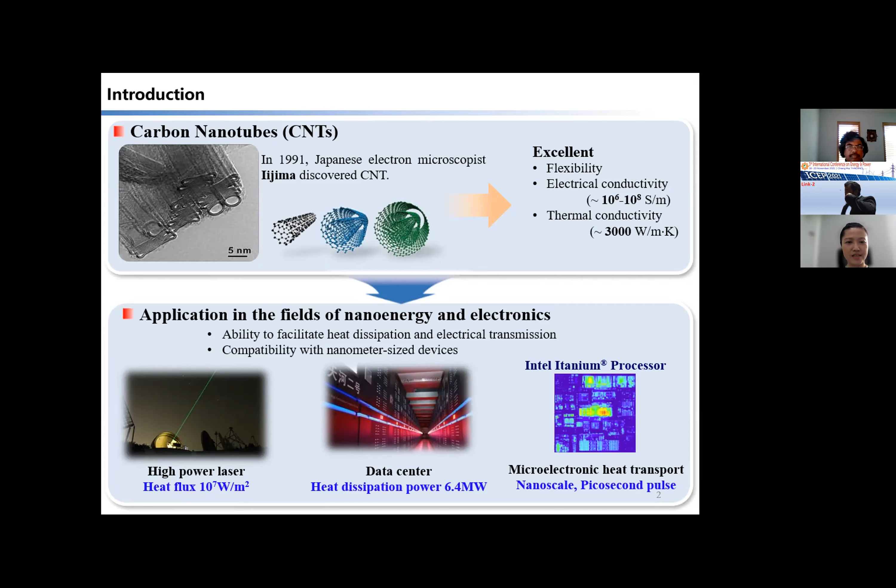Electron and phonon transport of carbon nanotubes has attracted much attention in the field of nano-energy and nanoelectronics due to its ability to facilitate heat dissipation, electrical transmission, and compatibility with various nanometer-size devices. However, once assembled, such as into bundles, fibers, and films for practical application, CNT tubes exhibit considerable performance deterioration due to phonon scattering, phonon mode quenching, electron hopping barriers, and numerous intertube interfacial structures acting as energy transport barriers. That is, the bulk electrical and thermal conductivities of CNT ensembles, a typical example being CNT fiber, show one order of magnitude reduction in both electrical and thermal conductivities. This clearly retards efficient application of the tubes. So developing new strategies to improve the interfacial thermal and electrical transport is critical for solving this drawback.

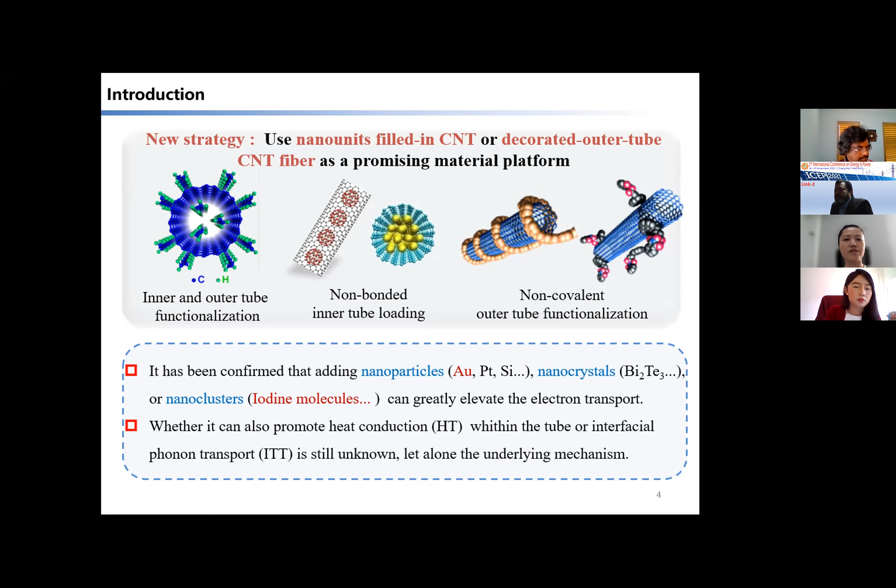We can use nano units filled inside the tube or decorated on the outer tube fiber as a promising material platform, such as inner and outer tube functionalization, non-bonded inner tube loading, non-covalent outer tube functionalization, and so on. It has been confirmed that adding nanoparticles such as gold nanoparticles, nanocrystals or nanoclusters, iodine molecules — the red color material is our focus — can greatly improve the electron transport. However, whether it can also promote heat conduction within the tube or interfacial transport, and the underlying mechanism, that's what I study.

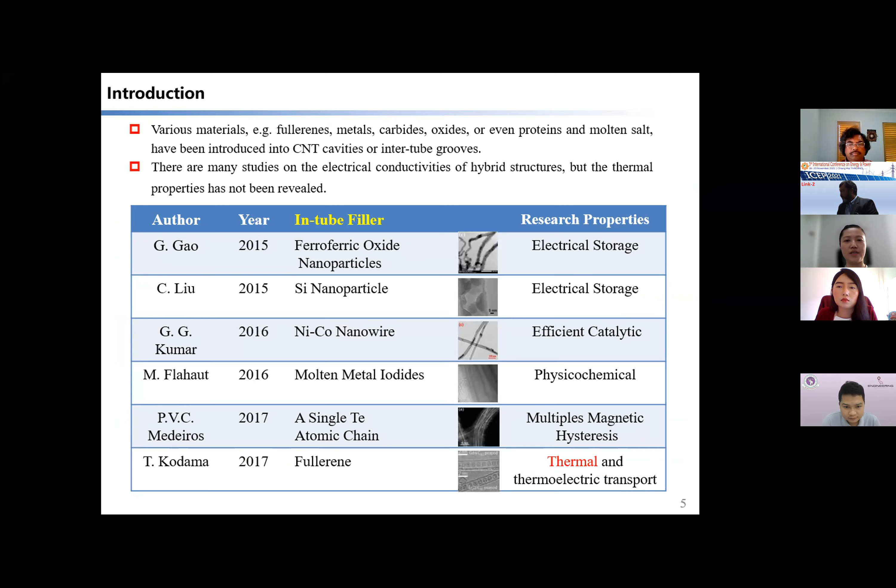In this talk, our material platform involves adding zero-dimensional spherical fullerene molecules and one-dimensional gold nanowires into the tube. On the other hand, we decorate gold metal nanoparticles and non-metallic iodine nanostrands onto the CNT fiber, outside the tube and inside the tube. That is, we have four kinds of assembled structures. The contribution of nano units to thermal, not electrical, transport is our main concern. The first two kinds of assembled structures are studied by molecular dynamics simulation due to difficulty, and the last two are studied experimentally and theoretically.

First, let's go to two interesting structures, that is heat conduction in filled carbon nanotubes. The first is a carbon nanopeapod — a carbon nanotube filled with spherical carbon-60 fullerene molecules. Carbon-60 represents the peas, and the tube represents the pod.

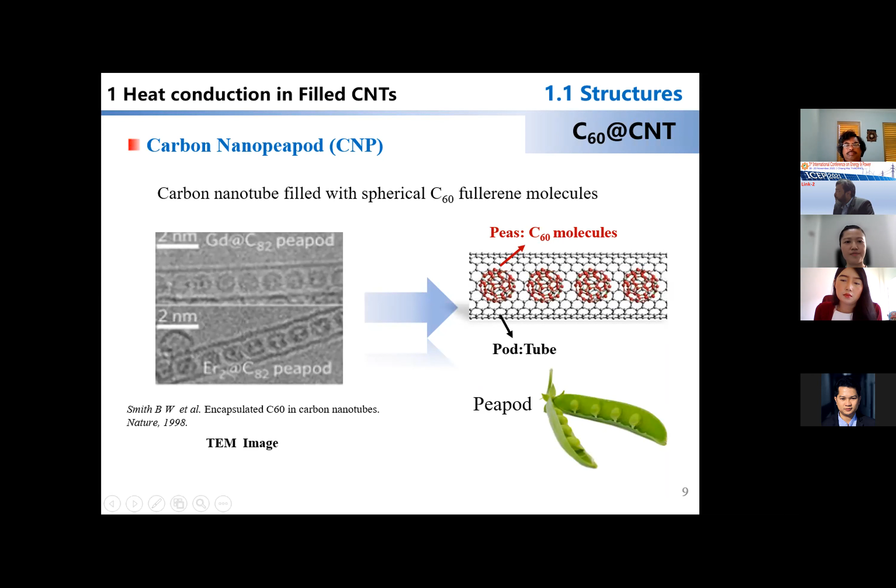Nanocables are composites of carbon nanotubes filled with nanowire. Here the filler is gold nanowire. The tube represents the insulating shell and the nanowire represents the conducting wire. The nanowire filled in the tube exhibits multi-shell packs consisting of coaxial cylindrical shells.

Based on carbon nanopeapod and nanocable models, we employed molecular dynamics to calculate thermal conductivity. The results show that filled carbon-60 can increase thermal conductivity up to 9.6 times, a huge enhancement.

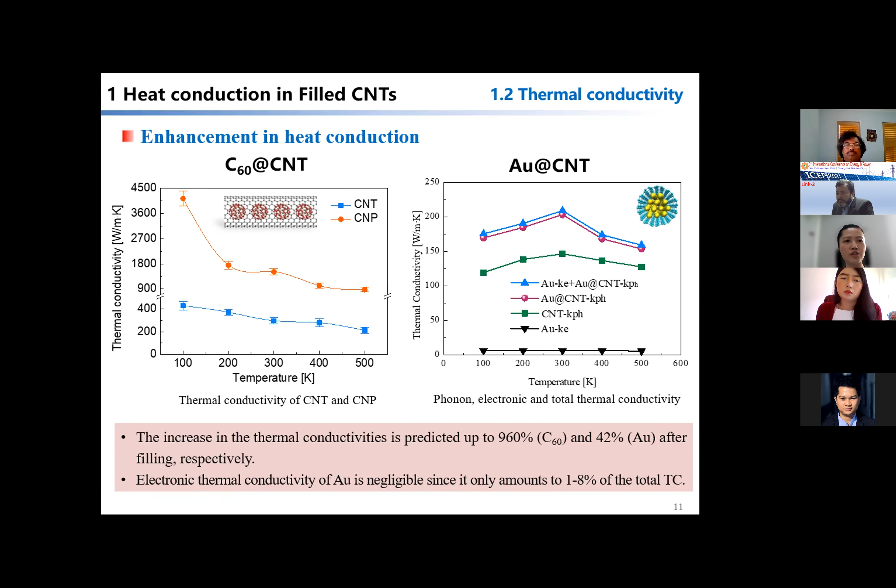Similarly, filled nanowire can also increase thermal conductivity, though not as much as carbon-60 filling, because gold and carbon are heterogeneous atoms. We further analyze this by local heat flux and the relative distribution of different phonon oscillation frequencies.

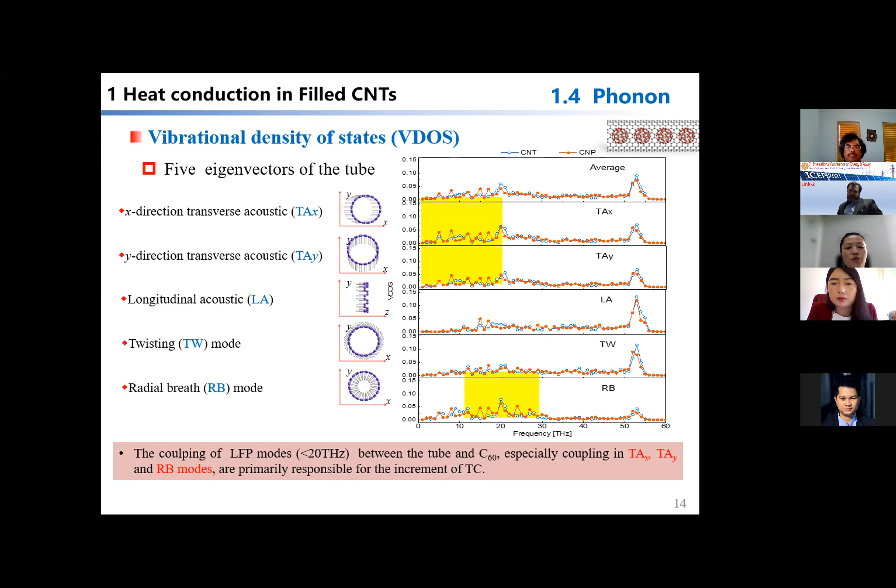We can see that the coupling of low frequency phonon modes, less than 20 THz, between the tube and filler especially coupling in XY direction transverse acoustic modes and radial breathing mode. We know that carbon tubes have a radial breathing mode, just like a breathing motion, which is primarily responsible for the increment of thermal conductivity.

However, when not fully filled, carbon-60 could have translational movement along the axis of the tube. As the filling ratio becomes larger than 50%, interestingly, the translational motion of carbon-60 molecules gets more and more restricted with increasing filling ratio.

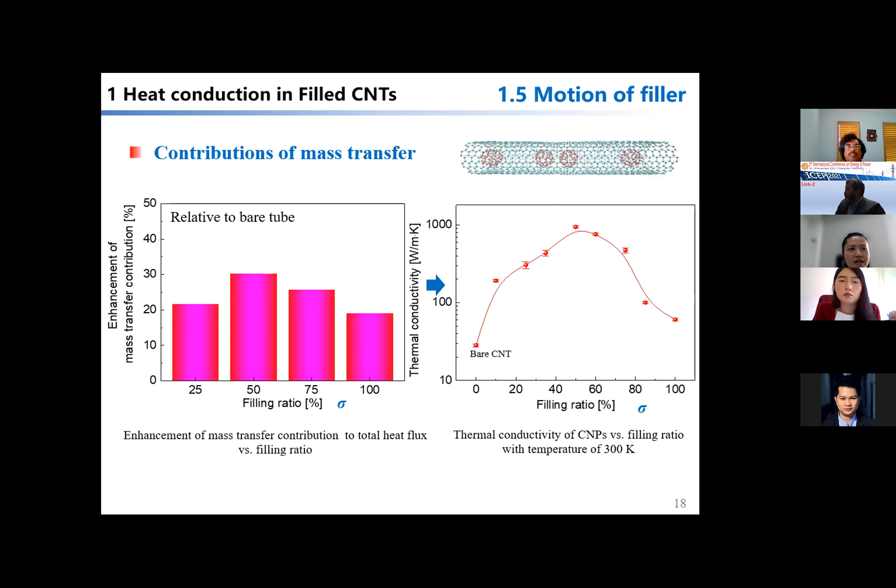This also explains why the thermal conductivity curve changes like this. That is, with boosted and then restricted motion of carbon-60, thermal conductivity first increases and then decreases with rising filling ratio.

So thermal conductivity could be precisely modulated by the filling-ratio-dependent movement of carbon-60.

That is, with increased filling ratio, the thermal conductivity increases first with boosted motion of carbon-60 and then decreases with restricted motion of carbon-60. It's a non-monotonic dependence on the filling ratio.

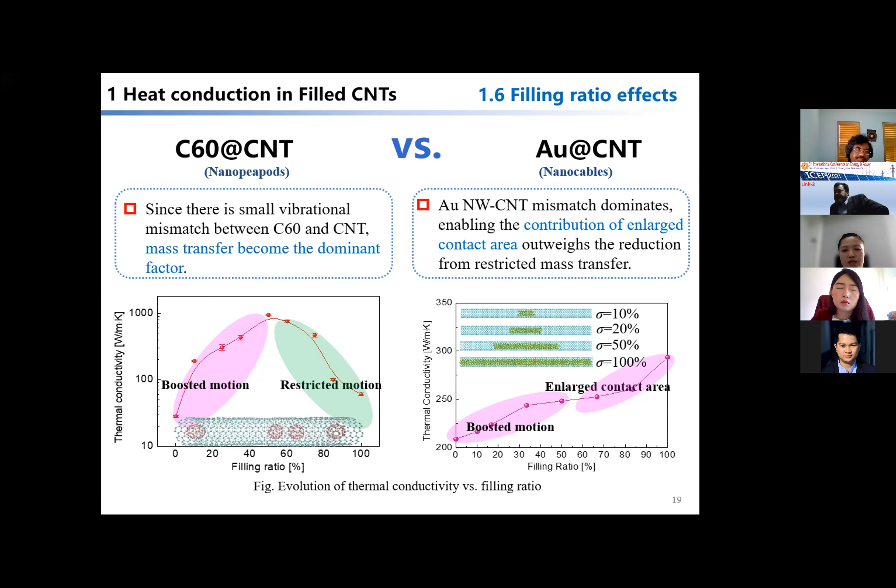Let's go to the second demonstration: intertube thermal transport of CNT fiber, intertube demonstration. Vertically aligned tube arrays were synthesized through chemical vapor deposition.

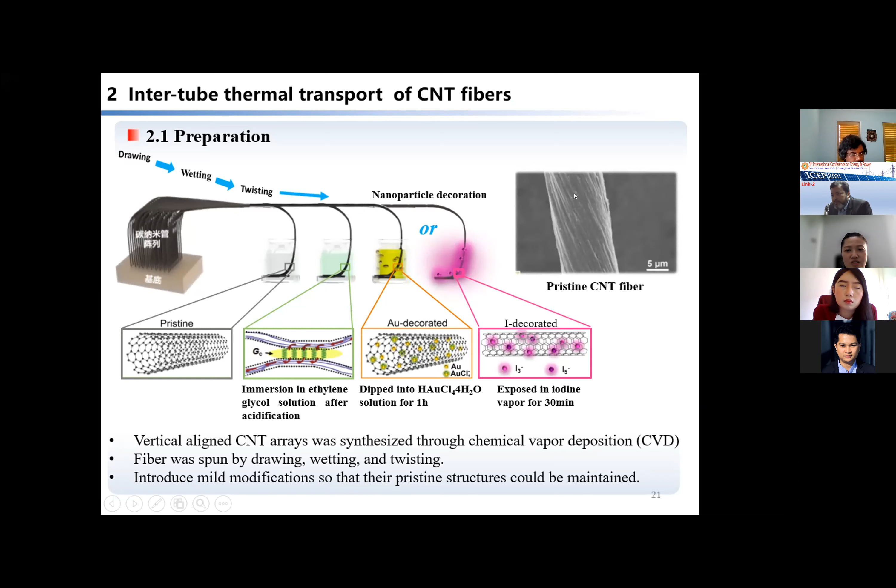Gold nanoparticle or iodine nanoparticle decoration: dip the fiber into the metallic salt solution or expose it to iodine vapor. We introduced mild modification so that the pristine structure could be maintained. This is pristine CNT fiber, which we compare with after decoration. After decoration, we tested the intrinsic thermal conductivity using our homemade 3-omega technique. The results show that after decoration, the intrinsic thermal conductivity for fibers less than 2 millimeters gets an improvement of about 70%. Both apparent and intrinsic thermal conductivity show quadratic length dependence owing to the radial heat loss through radiation.

Similarly, for iodine decorated fiber, this bar clearly shows that the intrinsic thermal conductivity of iodine decorated CNT fibers achieves a noticeable increase of up to 55%.

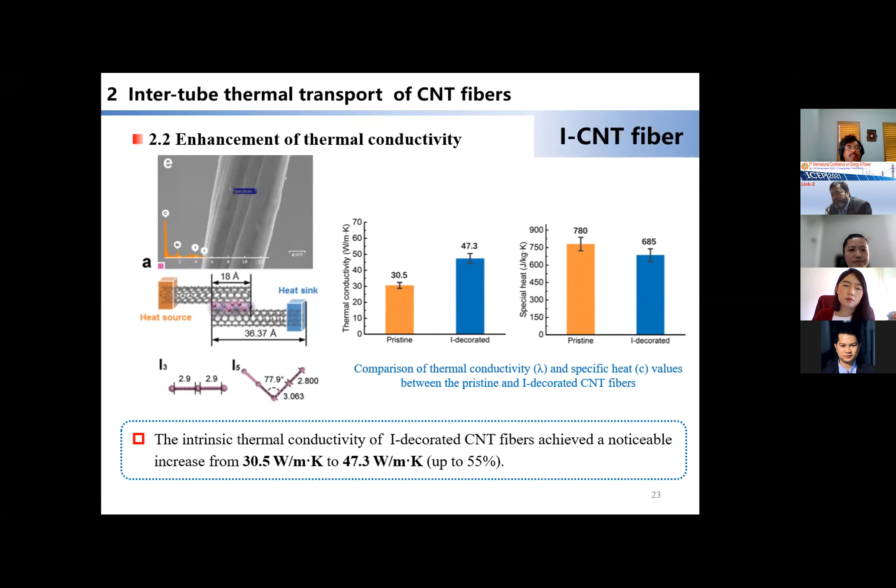The following is Raman spectra for different CNT fibers. We use Raman spectra to investigate the change of phonon vibrational modes of CNT fibers after decoration. Iodine molecules typically form charged I3, I5 chains, represented by two peaks in the Raman spectrum. The blue shift to the right in peak positions after decoration reflects a slight carbon-carbon bond shortening, which is a phonon-stiffening effect.

We can also see, after gold nanoparticle decoration, an obvious blue shift. Comparing these two pictures, the shift is equivalent, meaning an equivalent p-type doping effect - electrons were extracted from the tubes and used to reduce gold ions to gold atoms, that is, electron transfer. This results in weak bonding between gold and the tubes. Some sp2 graphitic plane-like carbon-carbon bonds transform into weak sp3 diamond-like bonds, without affecting the carbon nanotube structure. There is no real bond.

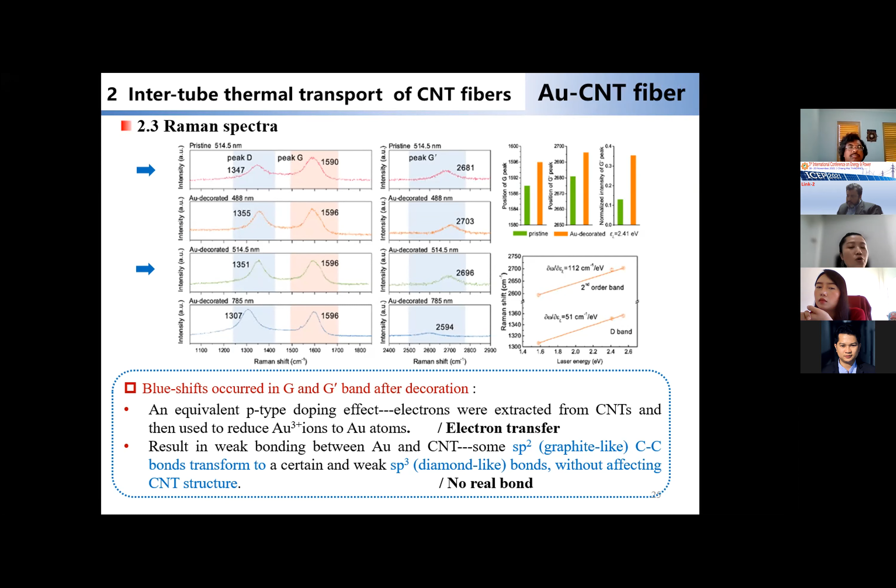Further examination of the frequency against laser excitation energy declares that gold decoration could retain a high phonon transport velocity, the same as the group velocity of a pure tube. This means slight decoration with gold nanoparticles will not deteriorate the phonon transport within the tubes.

Furthermore, let's look at the sharp increase of normalized intensity of the G′ peak. It reveals a stronger electron-phonon coupling, that is, electrons in gold and phonons in carbon atoms, enabling phonon mode interface coupling, possibly improving the interface transport.

This boosted phonon transport was further investigated using molecular dynamic simulations. Interestingly, with increased gold nanoparticle amount, the interface conductance first increases up to a plateau and then slightly reduces. We would deduce that excess addition of gold could possibly deteriorate the gold-carbon interfacial phonon transport and reduce the degree of boost.

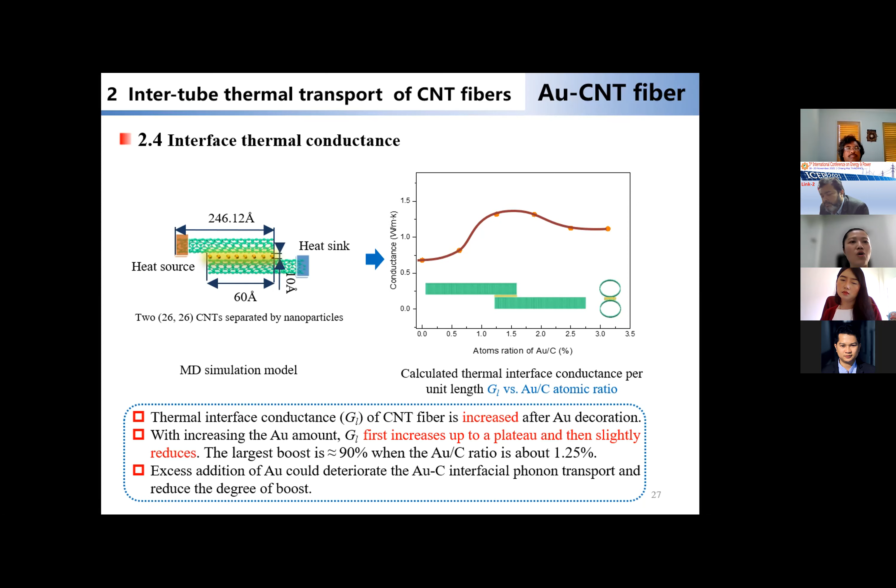I would like to give more details with VDOS analysis. We can see from the total VDOS that gold nanoparticles induce low frequency phonons, just like gold nanowires in a tube or carbon-60 in a tube, inducing low frequency phonon excitation in both the tube and the gold nanoparticle. With increased gold-to-carbon atomic ratio, we see an increase in low frequency phonons. Since low frequency phonons dominate the non-bonded thermal transport, the overall thermal conductivity gets boosted.

Let's look at the local VDOS of interfacial carbon atoms. On the heat source side first, it's similar to the pristine counterpart. On the heat sink side, there's a great enhancement of low frequency phonons in the frequency range of 2 to 3.5 THz, consistent with the gold nanoparticle vibrations, suggesting more low-frequency phonons are excited by gold nanoparticles in resonance with their vibration. I would like to emphasize that gold nanoparticles redistribute low frequency phonon modes into the interfacial carbon atoms and activate a resonance of low frequency phonons between the tube and gold nanoparticles.

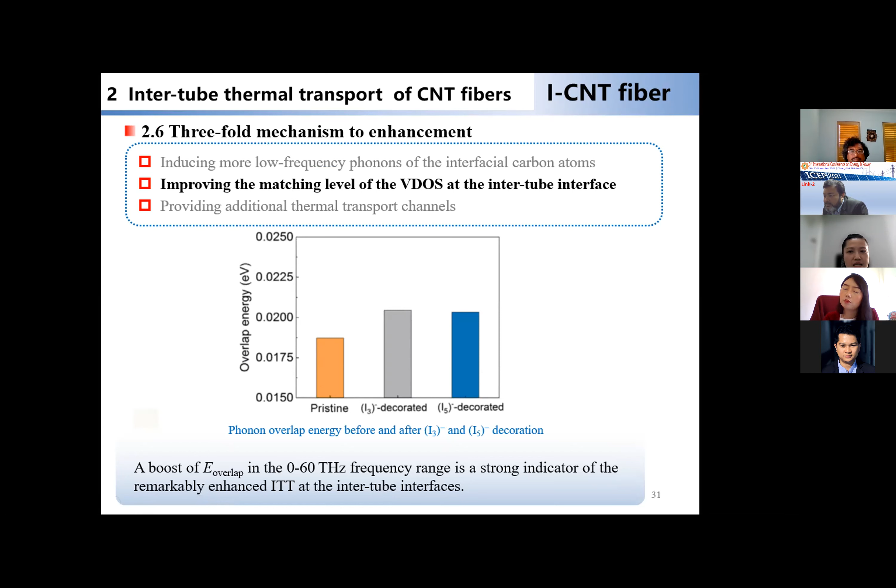The next mechanism is that iodine chains provide additional thermal transport channels. We further calculate the interfacial heat flux originating from tube 1 and tube 2, and tube 1 to iodine filler interactions, and their sum. This suggests that the CNT tube and iodine interactions indeed facilitate interface transport, which also confirms that iodine chains provide thermal transport channels between tubes.

Okay, finally, I would like to give a conclusion.

For enhancement of heat conduction in carbon nanotube assembled structures, we get it by adding carbon-60 or gold nanowire into the hollow tube of tubes, or using fiber decorated with gold nano units lying in or out the tube. They introduce more low frequency phonon (LFP) vibration density of states, since LFP dominates non-bonded thermal transport. So the overall thermal conductivity in composite nanostructures would get boosted. Of course, other discussed factors, such as high level matching of VDOS, movement of filler, enlarged contact area, slight decoration, and additional thermal transport channels are also beneficial to the enhancement of heat conduction.

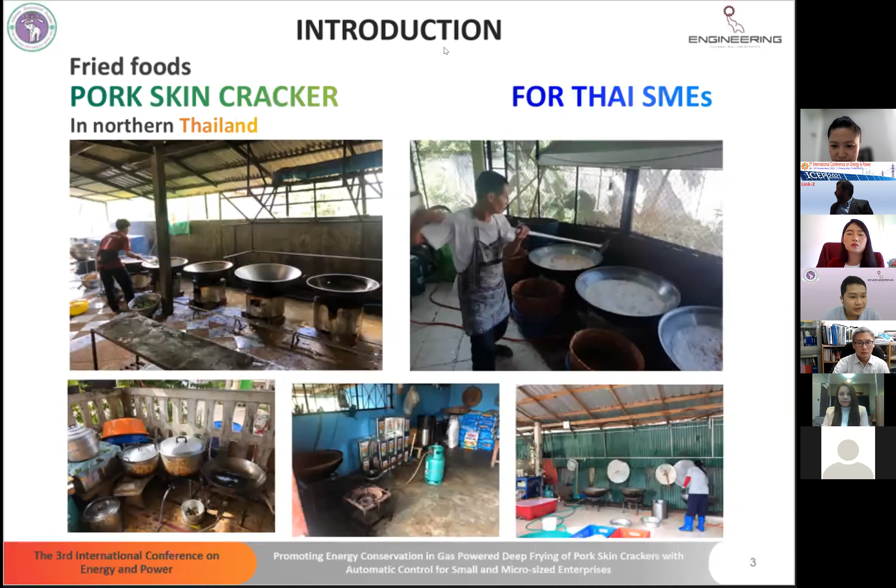In pork skin cracker production, these are the main things: the first one is a pan used to fry the raw pork skin, and the second one is a heat source, usually from LPG combustion. The operator controls the heat by this valve.

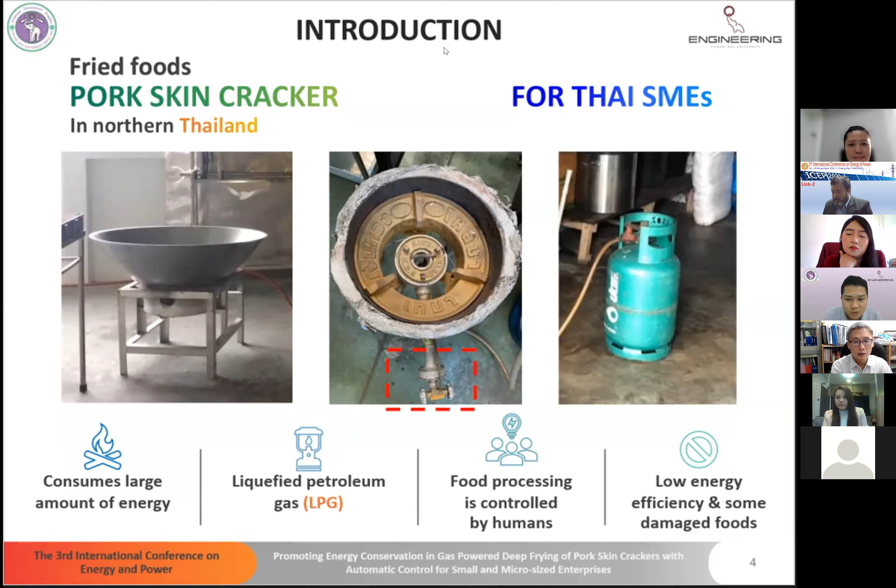This is less accurate control, so the process consumes a lot of energy and has very low energy efficiency, so some products are damaged.

So the objectives of this work were to develop a cost-effective and energy efficient fryer for processing pork skin crackers, and to demonstrate this proposed fryer to Thai pork skin cracker SMEs.

A moment, I cannot click. Okay.

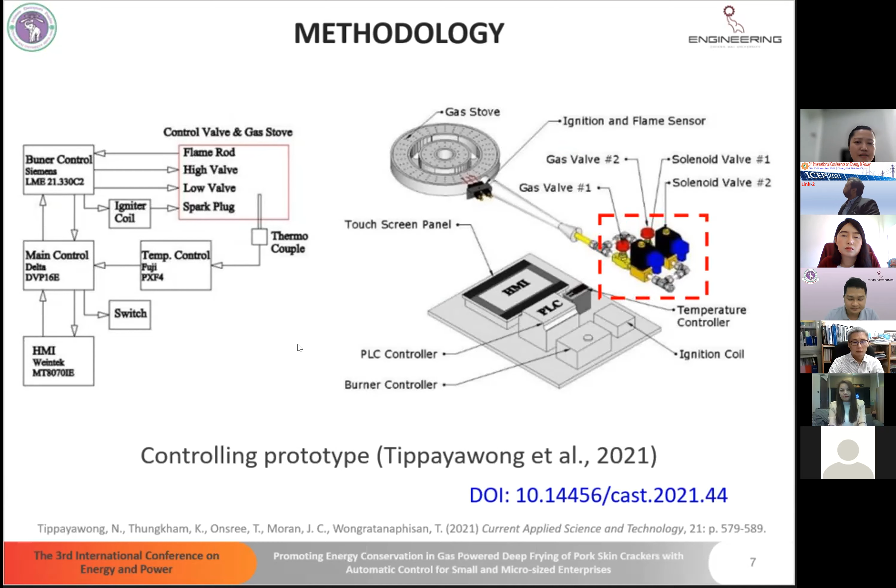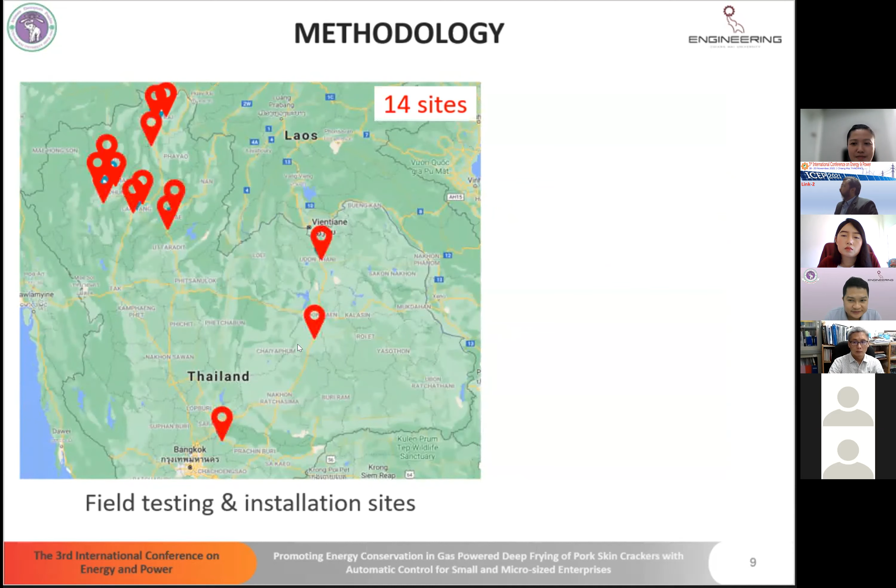The developed fryer was sent to 14 sites in Thailand, and we trained them on how to use our fryer, and they recorded the data of LPG use for us.

This is all the 14 sites that we visited. After using the fryer for almost 2 months, they said that they were satisfied with the operation and the quality of the product.

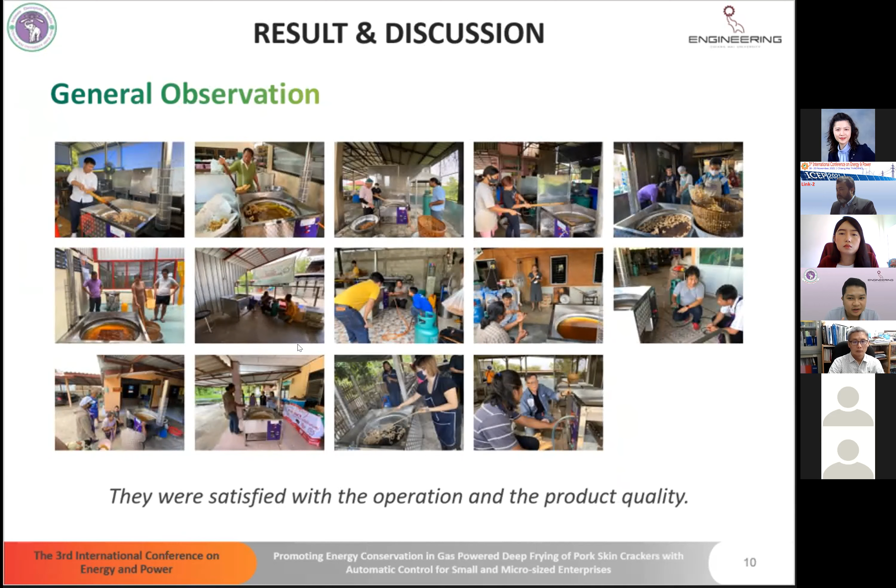Academically, by comparing the traditional one and what we developed: by the traditional fryer, or without the controller, the pork skin crackers normally take about 20 to 60 seconds to get done, and the frying oil temperature tends to drop when the raw pork skin is put into the pan.

So the operator would turn the LPG up to increase the heat input. By our developed fryer, the frying oil temperature was better stabilized at the desired value, so the operator just focused on the snack, letting the adjustment of the oil temperature be done automatically.

This is to show the difference between the traditional and what we developed fryers - a comparison of frying oil temperature between no control and having the control.

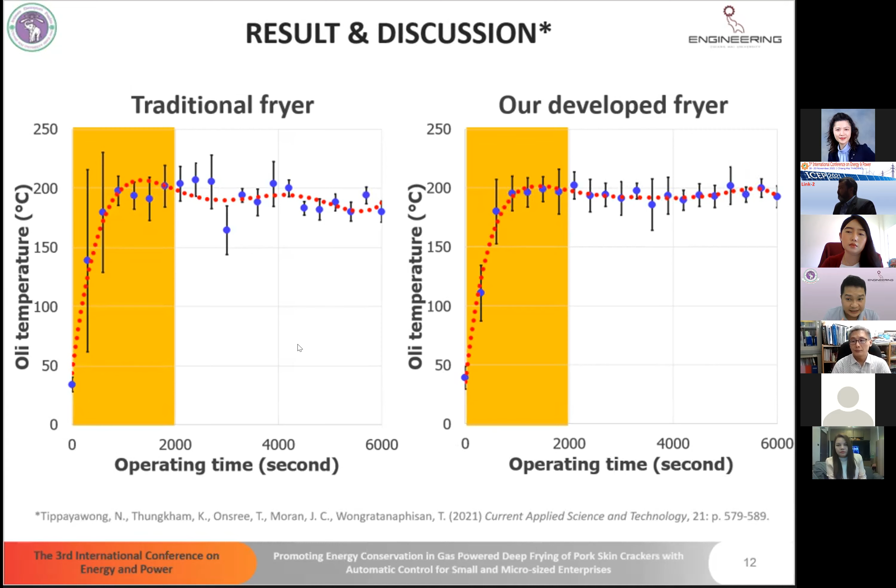And for our survey, for the 14 SMEs, generally they use about 60 to 800 kilogram of raw pork skin a day, and they use 3 or 4 hours a day to prepare the raw pork skin, and 2 or 3 hours a day to fry the product. And they work 5 or 6 days a week.

This is the data of LPG use of each SME we visited.

We compared the LPG use of them. We found that about 21% of LPG can be saved if they use our developed fryer.

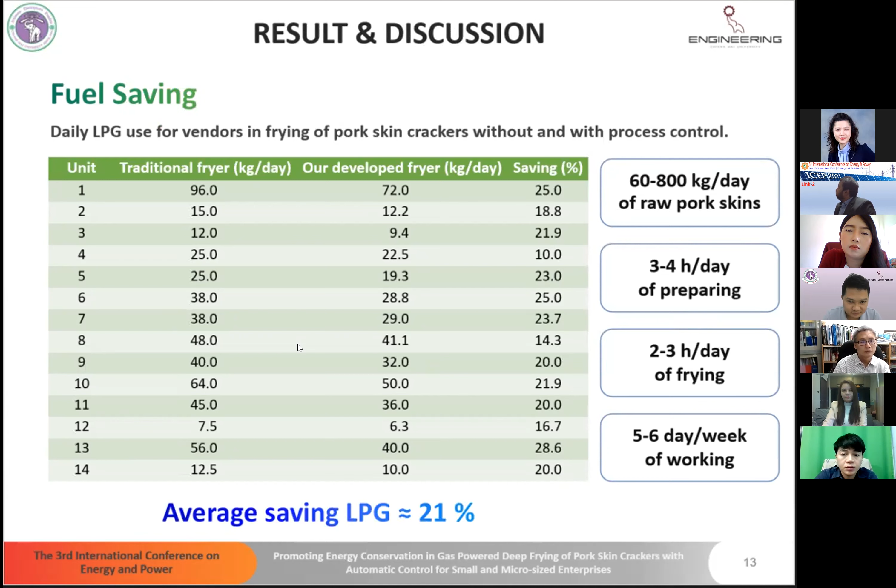With this number of savings, in a general case, a pork skin producer, let's say they have 100 kilogram a day of raw pork skin, and they can buy LPG at about 0.8 US dollar per kilogram.

By this number, they will save money for about 450 US dollars in 1 year. So if we sell the fryer at 2,700 US dollars, the owner who buys our fryer will have a 6 year payback.

Even though this number is quite big, for large production or with subsidy, it can be much smaller.

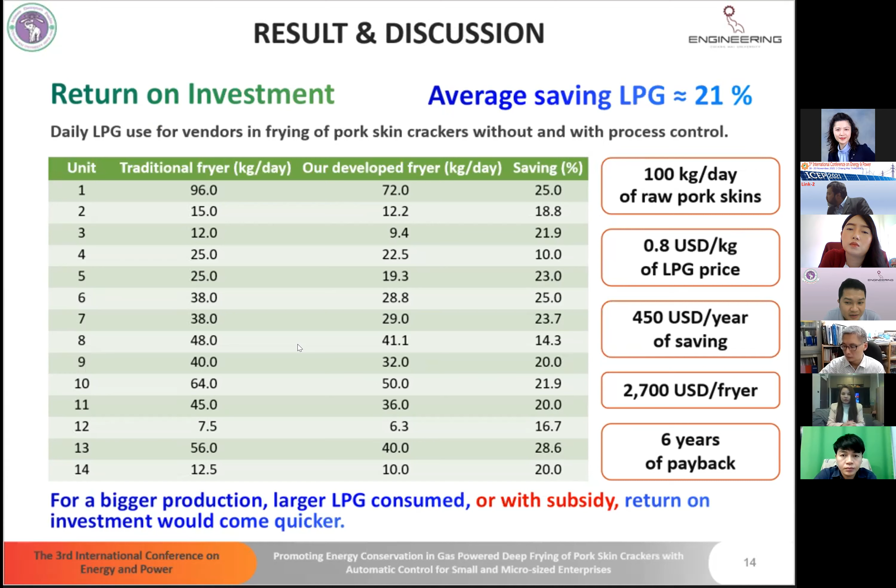So by now, I can conclude that our developed fryer appears to work very well - acceptable operation and saving in LPG consumption.

Academically, the employment of the LPG burner controller offers more precise process control, improved fuel economy, and energy efficiency for small and micro-size food processing enterprises.

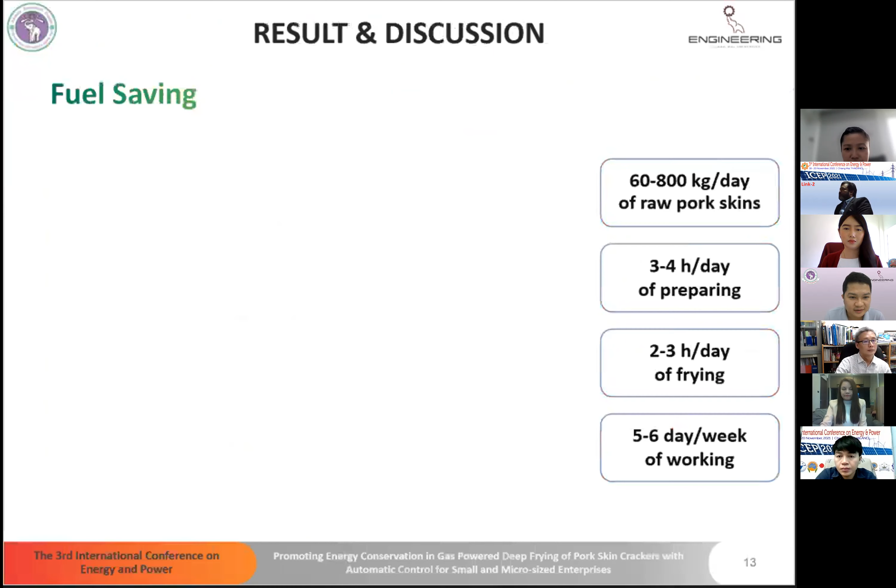Any question? Your presentation makes me hungry, a little hungry. Okay, of course, we just had our lunch. Any question?

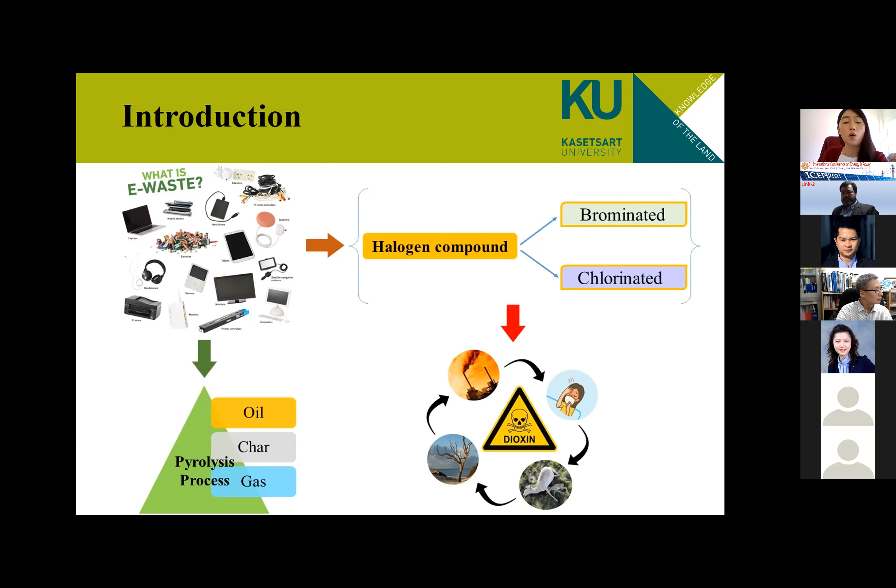The pyrolysis process is an interesting alternative technology because it can transform e-waste into many products, including oil, char, and gas.

Raw material: the raw material sample was cable.

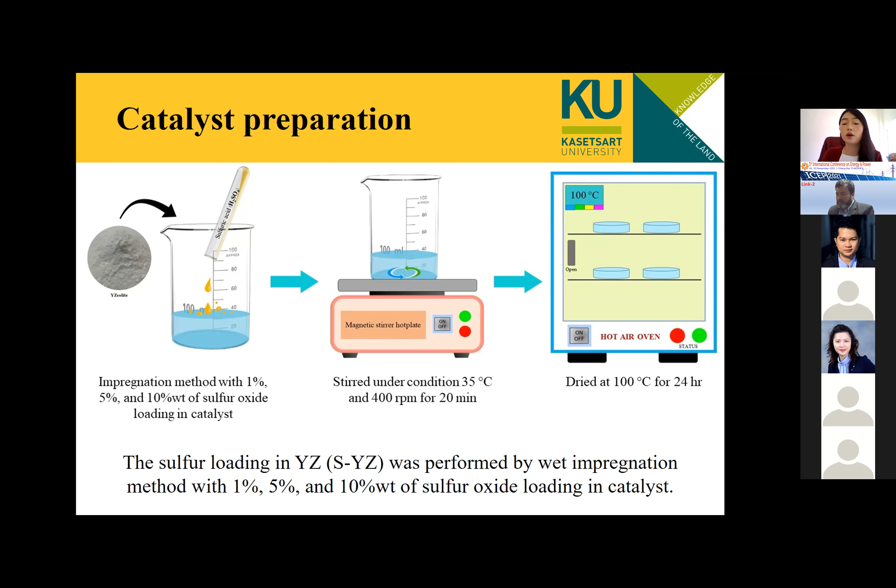Catalyst preparation. The conventional catalyst was Y zeolite. Sulfur loading in Y zeolite was performed by wet impregnation method with 1, 5, and 10% by weight sulfur loading in the catalyst. Firstly, 10 grams of Y zeolite and sulfuric acid was mixed in deionized water. Then the mixed catalyst was stirred under conditions of 35 Celsius and 400 revolutions per minute for 20 minutes.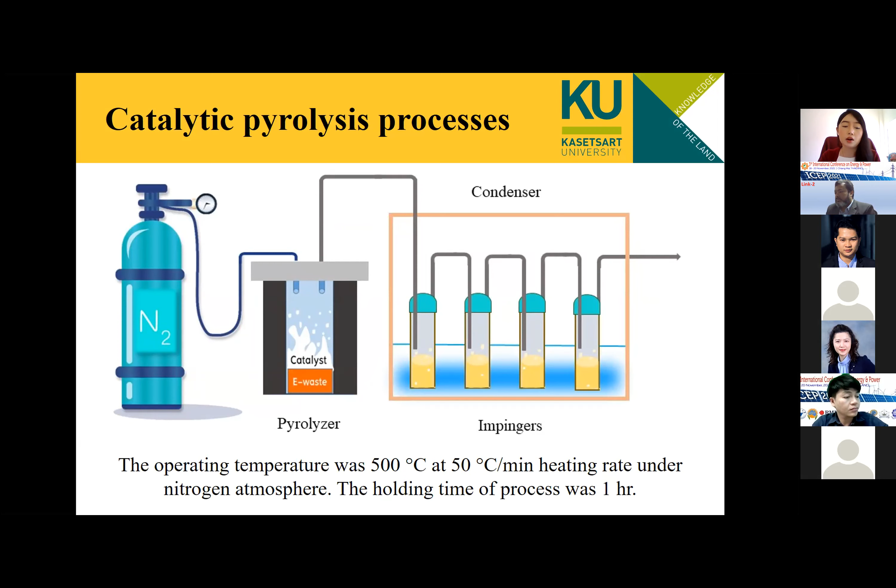Catalytic pyrolysis process. Input of these experiments consists of 50 grams of raw material and 10 grams of catalyst. The operating temperature was 500 Celsius at 50 Celsius per minute heating rate under nitrogen atmosphere. The holding time of the process was 1 hour.

The analysis methods used were proximate analysis, ultimate analysis, BET, XRF, XRD, SEM, EDS, and the last one is ion chromatography or IC.

Result and discussion. Catalyst characterization.

Looking at table 2, you can see the catalyst characterization. Sulfur generally can be absorbed in the Y zeolite catalyst. The BET surface area and porosity of the catalyst were negligibly different with 1% sulfur additive. However, the additive of 5 and 10% sulfur in white silicide catalyst gave impact on BET surface area, pore volume and average pore size. The BET surface area and pore volume of 10% sulfur Y zeolite were significantly reduced due to the excess sulfur in the white silicide catalyst.

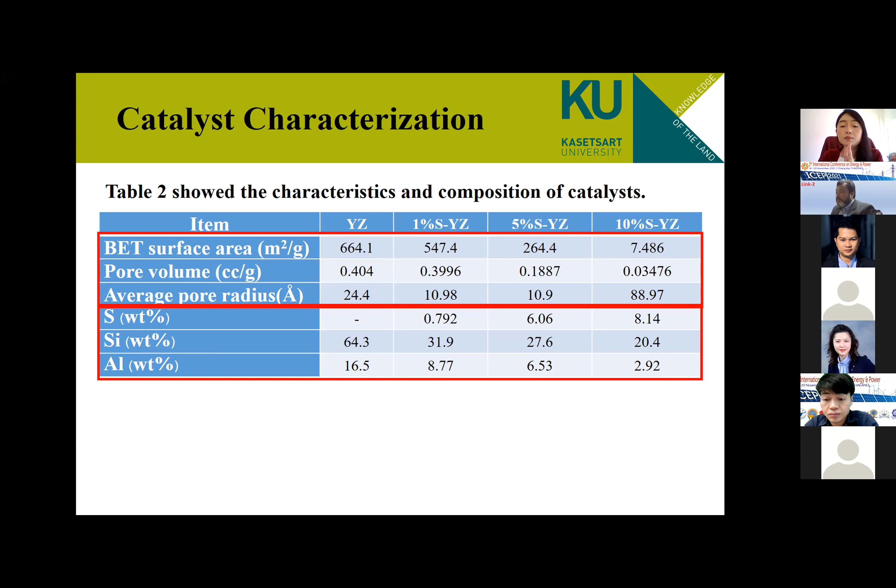The major chemical composition of sulfur white silicide was sulfur, silica, and alumina, as measured by XRF. The silica and alumina were the majority of the original white silicide composition.

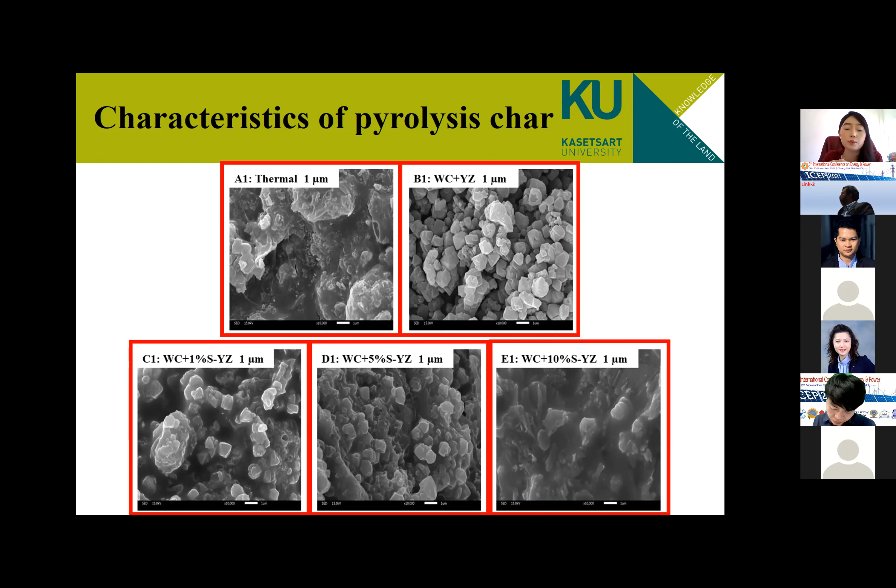Mechanism of the dechlorination process. For the white silicide catalyst, the chlorine yield in pyrolysis char was increased compared to thermal pyrolysis, because the white silicide had high porosity and strong acidity. These characteristics of white silicide enhanced chloride ion capture and the cracking of organochlorinated compounds in pyrolysis oil.

In case of loading sulfur white solid catalyst, the chloride ion capture of sulfur white solid catalyst was higher than that of white solid, because hydrochloride in the volatile matter was captured by sulfur trioxide in the catalyst and reacted to form chlorosulfuric acid.

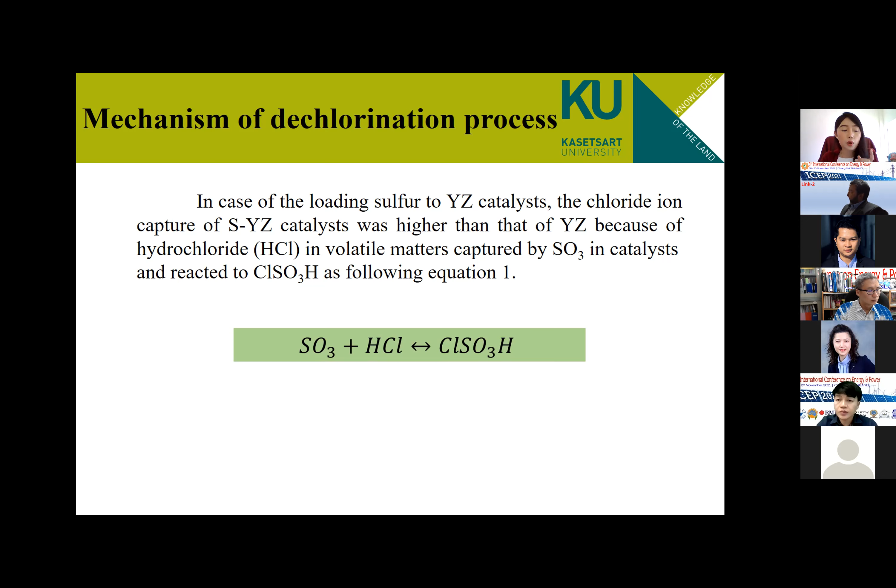As following equation 1: the mechanism of white solid in 10% sulfur white solid was chloride ion cracking and capturing constantly. In this case, the cracking rate of 10% sulfur Y zeolite catalyst was greatly higher than the capture rate of the sulfur trioxide. In addition, the 10% sulfur rate had lower porosity and BET surface area.

Therefore, 10% sulfur rate could not absorb all chloride content in the volatile matter. This result shows that the amount of pyrolysis oil is low while the amount of pyrolysis char is high by waste cable pyrolysis. The pyrolysis char component was carbon, silica, calcium, titanium, and aluminum ion.

The yield of chloride in pyrolysis oil was 2.98 to 11.47% by weight of total chloride content.

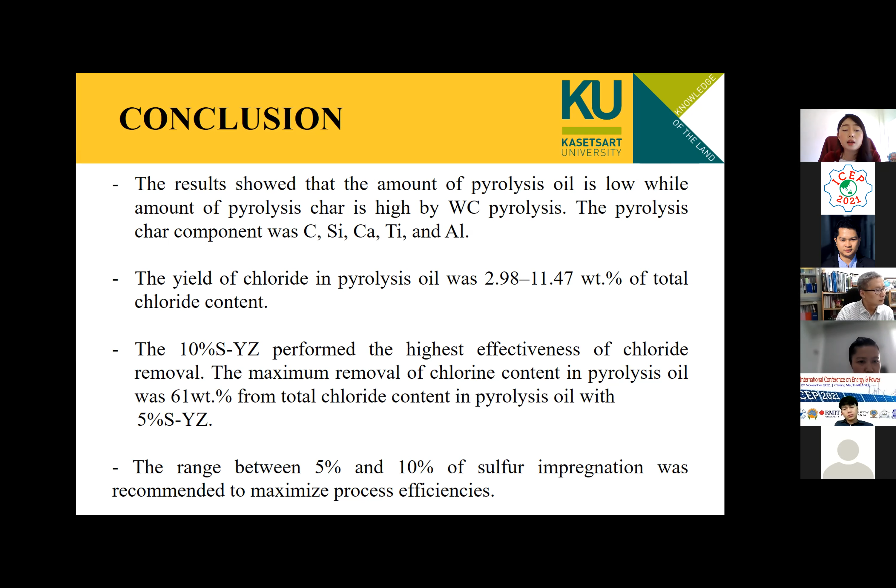The 10% sulfur Y zeolite performed the highest effectiveness of chloride removal; the maximum removal of chloride content in pyrolysis oil was 61% by weight from total chloride content in the pyrolysis oil with 5% sulfur Y zeolite. A sulfur impregnation rate between 5 and 10 was recommended for maximum process efficiency.

Thank you for attention. Do you have any question?

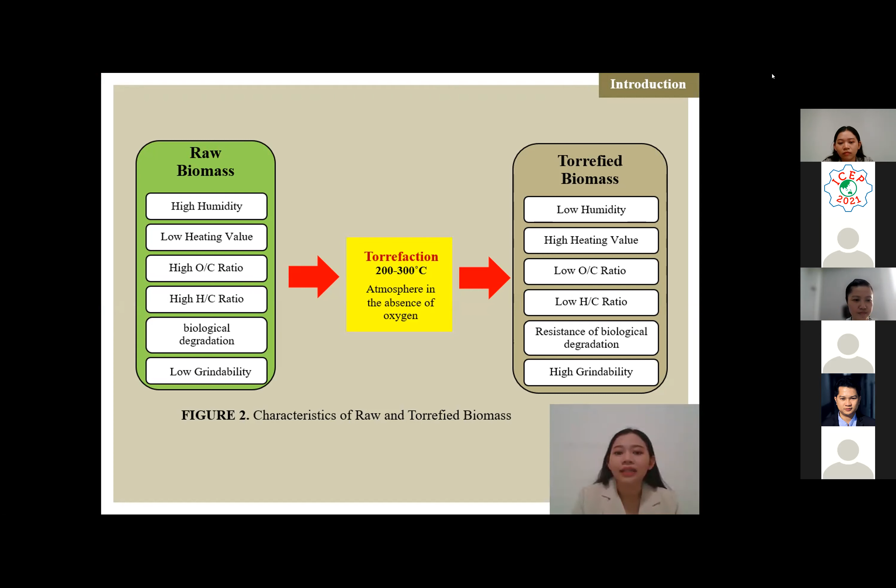The instrument used in the experiment is a fixed bed reactor. It is made of stainless steel, having 50 mm outside diameter and 1000 mm length. The temperature was measured and controlled by a K-type thermocouple and a proportional integral derivative temperature controller.

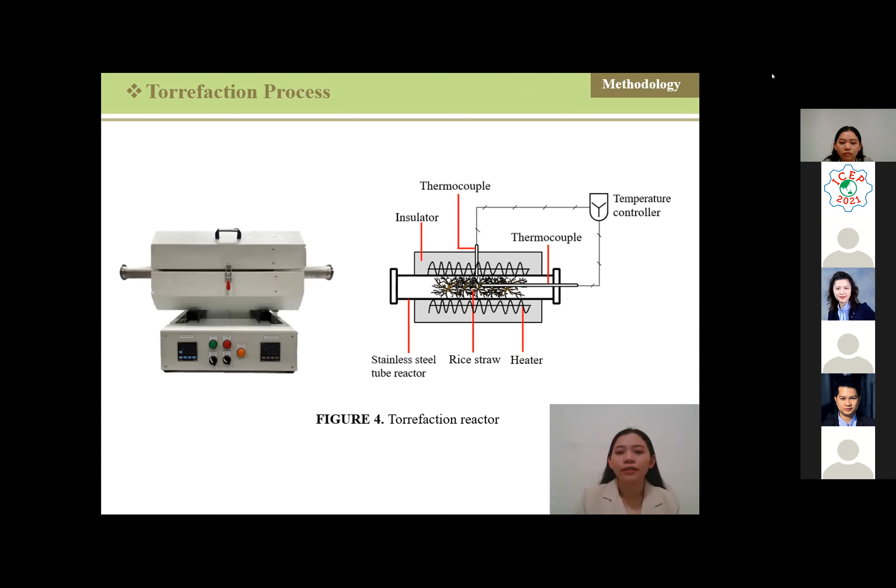The experiments were planned by central composite design between 200 to 300 degrees Celsius, reaction time 25.7 to 54.3 minutes. The heating rate was set at 5 degrees Celsius per minute. Data collection includes mass, high heating value, and electrical energy for calculation of energy yield and specific energy consumption.

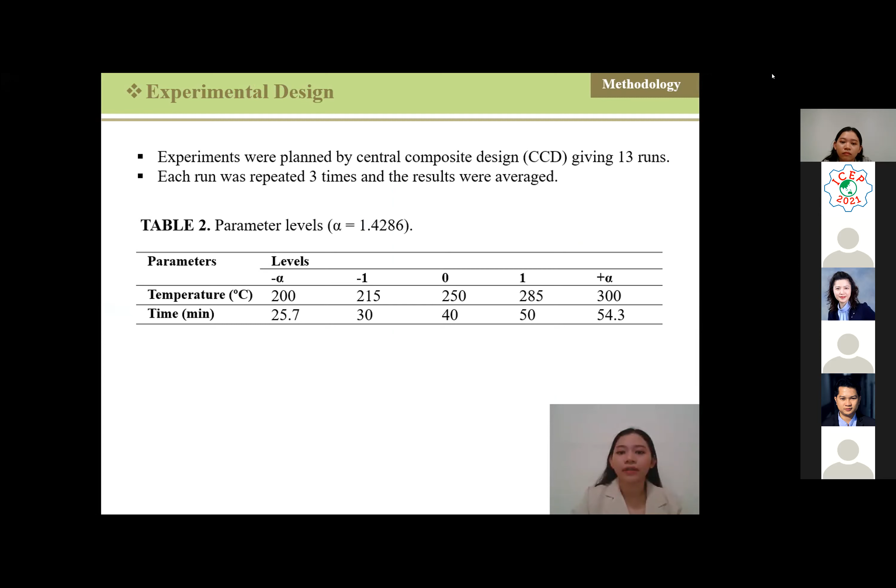The temperature and reaction time are shown in table 2. Each run was repeated 3 times and the results were averaged. Mass yield and energy densification ratio can be calculated from equations 1 and 2 as shown in this line.

The torrefaction was optimized by using energy yield and specific energy consumption during the process, determined by equations 3 and 4. For optimization, energy yield and specific energy consumption are considered as the main factors to obtain and optimize temperature and time for the best rice straw torrefaction.

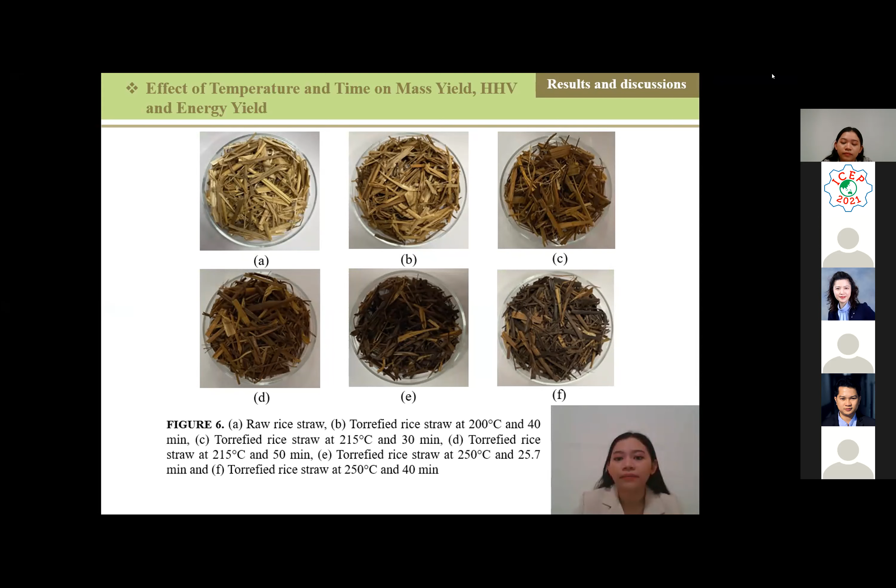86.24%. It was reported that torrefaction gave biomass valorization because of moisture reduction and decomposition of hemicellulose. An increase in temperature and time resulted in lower mass yield and higher heating value.

The energy yield of torrefied rice straw ranged from 52.91% to 96.16%. It was obvious that higher temperature would result in lower energy yield. The decrease can be explained by the thermal decomposition of rice straw.

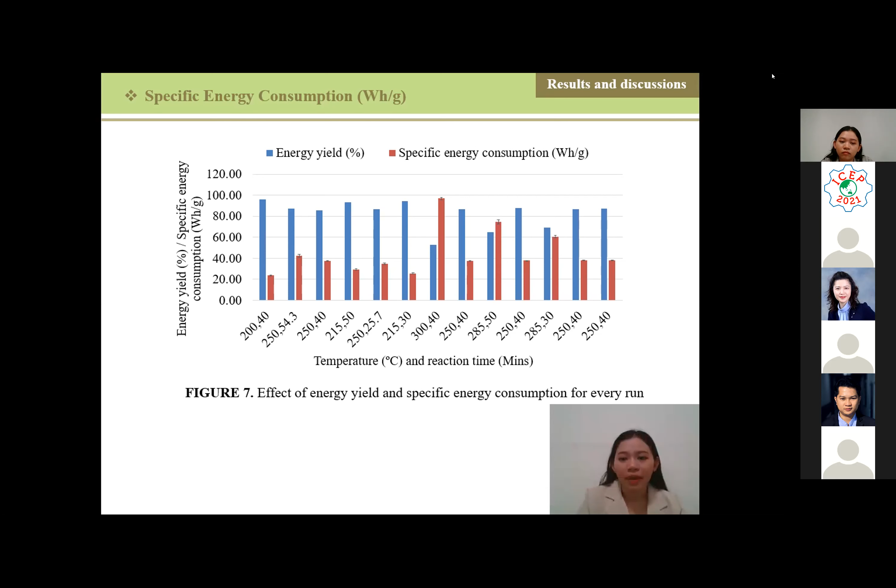As shown in figure 7, it can be said that high temperature and longer reaction time resulted in high energy consumption. But this gave high specific energy consumption, which is not suggested, although the high heating value and energy densification ratio were high. It's worth noting that not only high heating value, but also mass yield must be considered for torrefaction optimization.

In summary, rice straw was upgraded by torrefaction. Low temperature torrefaction was produced while reaction time was varied. The temperature and time varied at 200 to 300 degrees Celsius and 25.7 to 54.3 minutes respectively.

Based on the results, it was finally concluded that the highest energy yield of 96.16% and lowest specific energy consumption of 23.73 watt-hour per gram were achieved at 200 degrees Celsius and 40 minutes, while the second best energy yield and specific energy consumption, 94.06% and 25.5 watt-hour per gram respectively, were obtained at 215 degrees Celsius, 30 minutes. Thus, these two conditions were suggested for rice straw upgraded via torrefaction.

As we all know, we are depleting energy, and the energy crisis is becoming worse and worse in the last few decades. According to statistics from Our World in Data, world energy consumption is increasing all the time, among which the consumption of fossil fuel, including coal, oil, and gas, has been making up the largest part for decades, and it is still going up year by year. The latest number in 2019 shows that about 84% of the world's energy was supplied by fossil fuel.

As we know, with the consumption of fossil fuel, normally CO2 emissions and heat are generated. But the efficiency of using fossil fuel is quite low, with a large part of its energy dissipated through waste heat. So we may wonder whether there is a method to recover the wasted heat, or at least recover part of it. Fortunately, we do have such a potential technology, called the Thermoelectric Generator.

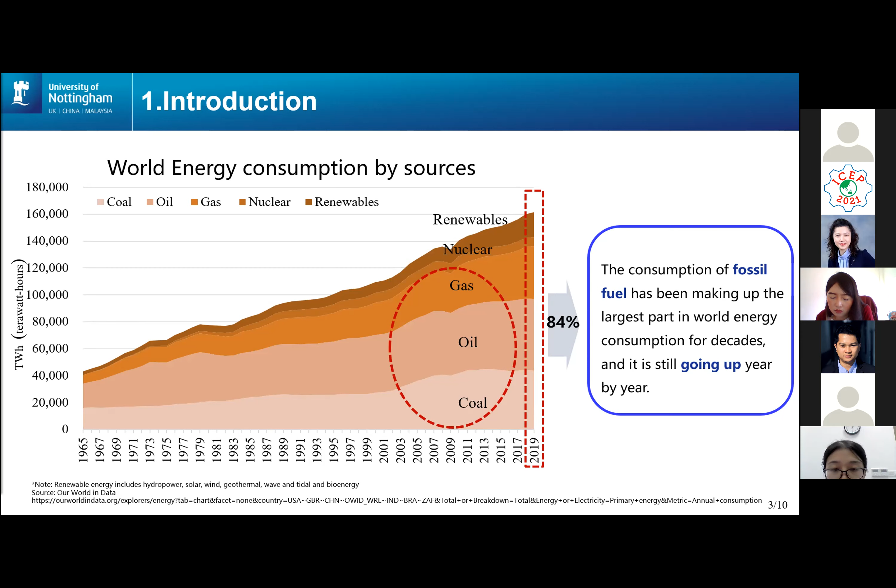The TEG has been widely used in various applications, including aerospace, solar energy, ocean energy, automobiles, households, and wearable equipment, and so on. However, wider application of the TEG technology is limited by its low conversion efficiency.

Studies have shown that in order to have larger conversion efficiency and power output, a higher temperature difference between the hot side and cold side of the TEG module should be maintained. There are several aspects influencing this temperature difference.

One of the important aspects is the thermal contact resistance existing between two different materials. The thermal contact resistance plays a vital role in the TEG structure and geometry optimization and its performance. Therefore, in order to get an accurate value of the thermal contact resistances in a TEG system, an experimental test rig was designed.

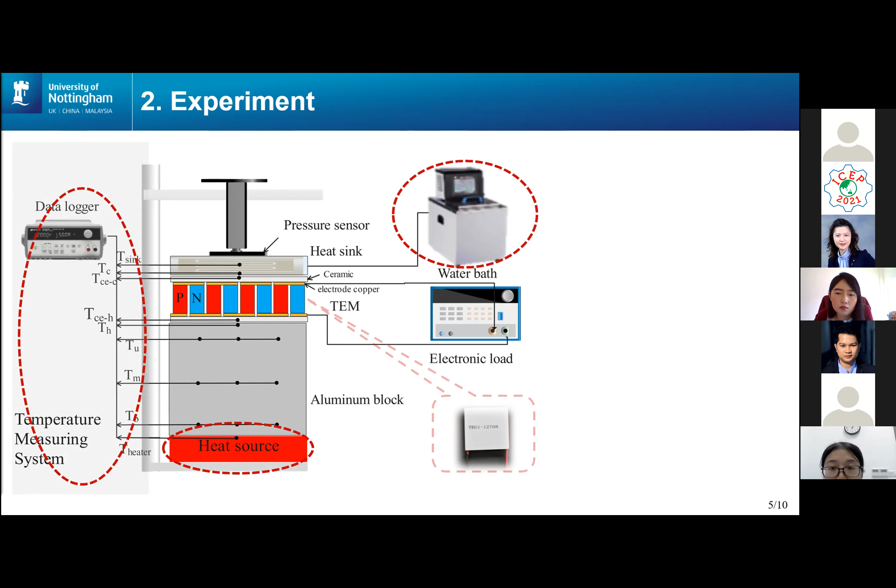The temperature at different locations is measured by the temperature measuring system, and the heat flux through the TEG system is calculated by these measured temperatures. The data processing is given on the right.

The heat flux into the TEG module is calculated by the temperature measured in the aluminum block, which is between the heat source and the hot side surface of the TEG module. The thermal resistance of different layers in the TEG module, including the ceramic layer, the copper layer, and the TE legs, are calculated by these equations, where the subscript i refers to the different materials.

Combining the heat flux, the measured temperature, and the calculated thermal resistance of different materials in the TEG system, the thermal contact resistances can be derived.

With our test rig, three different thermal contact resistances at different locations in the system are measured. That includes the thermal contact resistance on the hot side, on the cold side, and inside the module. The total thermal contact resistance is the sum of the three.

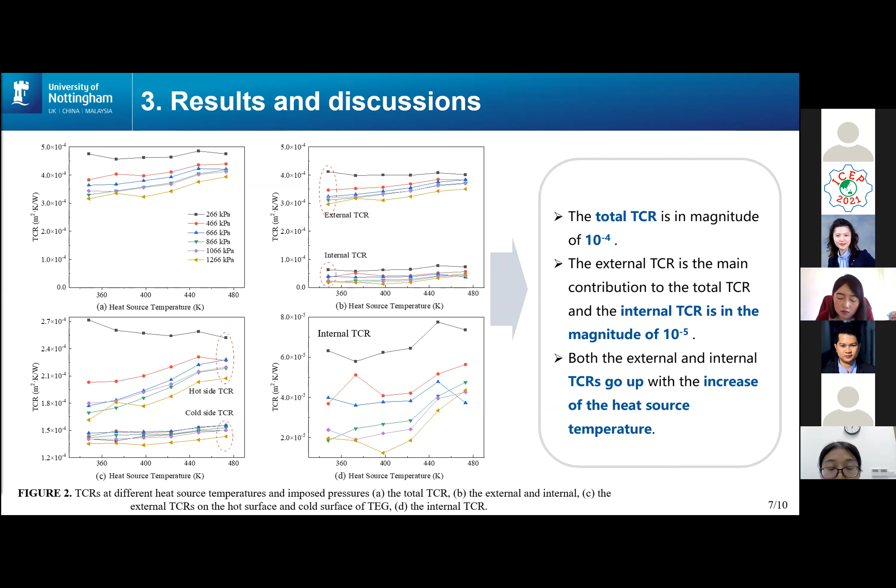The charts on the bottom respectively give detailed information on the TCRs on the hot side and cold side and the internal TCR. It can be concluded that both the external and internal TCRs go up with the increase of heat source temperature.

The four charts here show the influence of load pressure on the thermal contact resistances. From the results, we can see that all the TCRs decrease generally with the increase of load pressure. The impact of load pressure on the TCR is more significant when the heat source temperature is low.

From our experiment, some important conclusions can be made. The main conclusions are listed here. The value of different TCRs can be obtained. It should be noted that the pressure on TCR is much more significant at relatively low heat source temperatures. The external TCR on the hot side is always larger than its counterpart on the cold side.

From our experiment, we can see that the load pressure plays a vital role influencing the TCRs and the performance of the TEG system. Therefore, when a TEG module is installed, the load pressure is an important consideration to pursue a lower thermal contact resistance and thus achieve better performance.

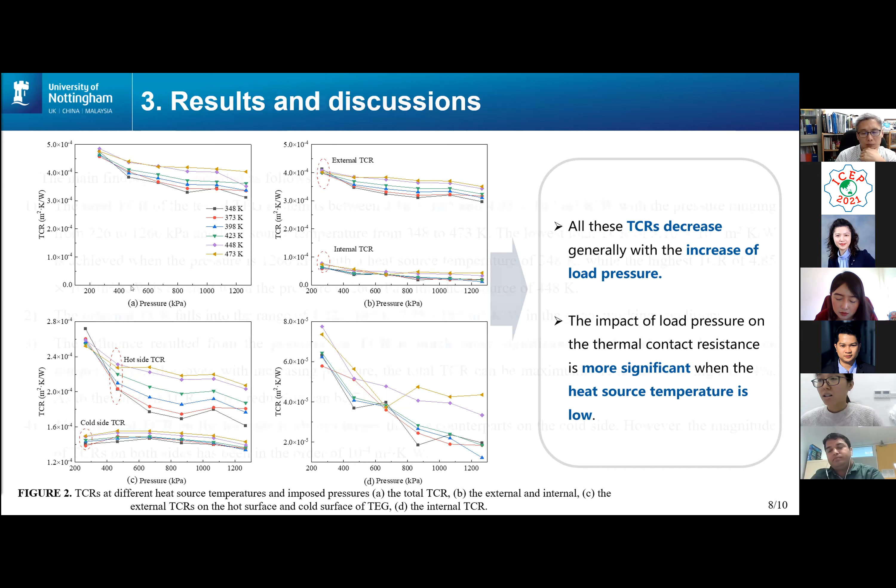Your pressure scope—please turn to the page of conclusion. We see that you can change the pressure range from more than 200. What is the real range? What is the real range in the TEG system?

I understand your question. It varies from different systems, because normally we install the TEG module in a system with a heat source and a cooling heat sink. If you apply different pressures, that will present different performance. It depends—it's different from system to system.

Okay. Thank you. Thank you. May I ask a question? Yes, please. Thank you very much, and thanks for the good presentation.

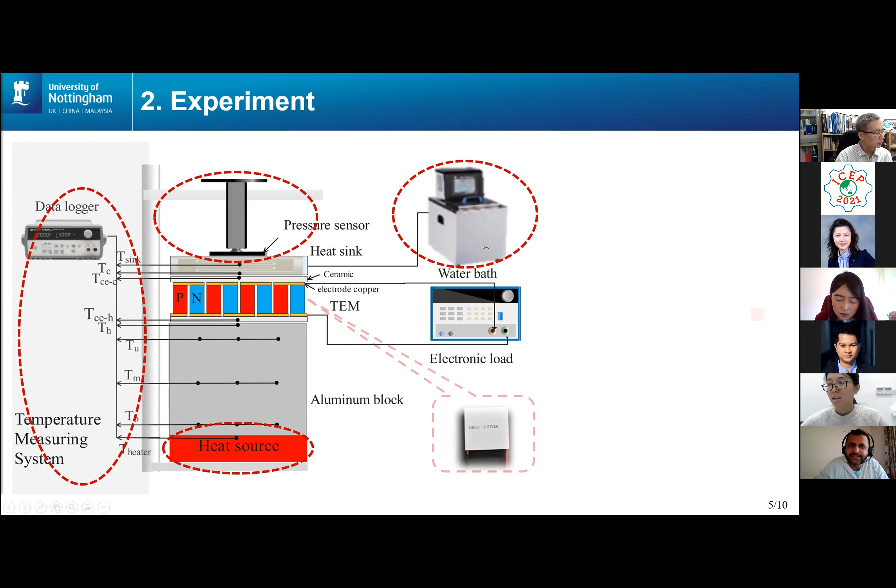The question is about whether you've seen any effect of the mechanical pressure that you're changing on the TEG, on the mechanical structural stability of the thermoelectric cells. By changing the pressure, do you see any loss of electrical contacts or any other mechanical damage to the thermoelectric cells?

Yes, we do see some mechanical damage on the TEG module, because the ceramic layer in the TEG module is quite fragile. If the pressure is very large, it may be broken. So that is a difficult question.

But there's no damage to the electrical contacts? The electrical contacts are inside the P and N junctions. Yes, if the TEG module is broken, the thermal contact resistance will increase largely.

So I think maybe I'd advise that an extension of this research could be finding an optimum operational pressure where you get the minimum contact resistance, but it's still mechanically strong and stable. Okay, yes, good. Thank you for your suggestion.

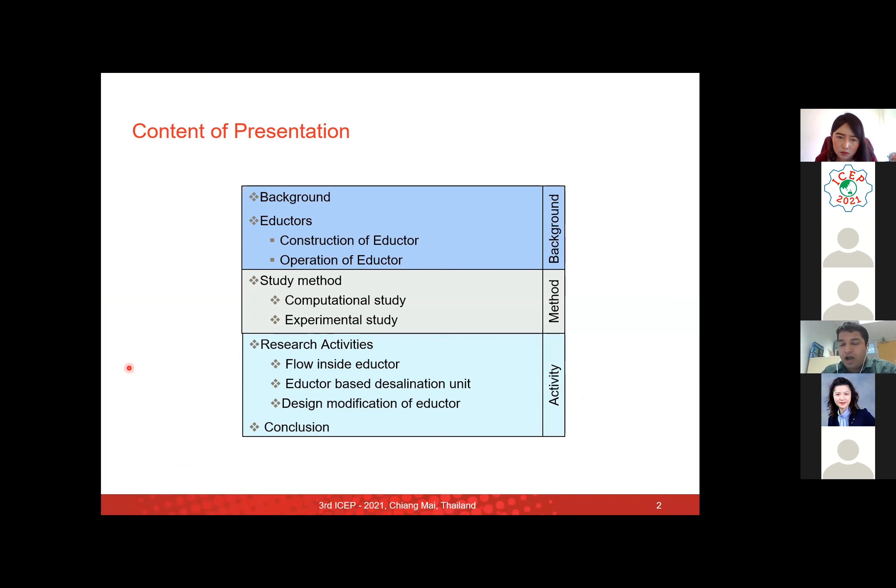So majorly, we're talking about eductor and freshwater production, that's the desalination process. A quick background on what we are going to talk about: the basic background on where the research lies, what methods we implemented for the study, and some of the major research outcomes from the activities performed.

So a quick background: as we are well aware, we have a global rising problem due to urbanization and other factors, and the stress of water is increasing every day. On the other hand, in industrial applications based on mechanical or heat implementation sectors, there are large amounts of heat being wasted, or let's say low-grade heat being wasted, either from industries or from solar sources.

So this project was carried out with an aim of bringing together two different problems from two different sectors to reach a common, sustainable solution for producing fresh water. Saline or salty water, which covers most of our Earth's surface, can be desalinated using these low-grade waste heats, and a sustainable water production process can be developed. So there are opportunities to solve future challenges on energy efficiency and water crisis.

So basically, thermal desalination means it's a freshwater production process where salts are separated from salty water, sea water, brine water, or other waste waters. There are two kinds of processes: thermal and mechanical. Mechanical processes, although very simple, consume very large amounts of energy, whereas thermal desalination processes can produce a relatively higher amount of water.

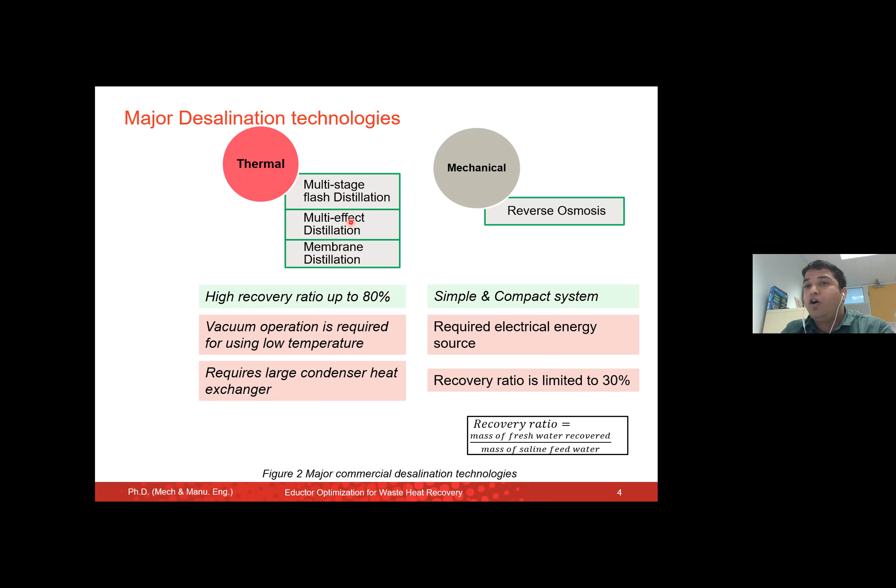These are the three basic water production processes largely implemented in industries or off-grid systems. But the thing is they need very large vacuum operation systems and large condenser systems, as they are thermally operated, vaporizing the water and then condensing these vapors to produce fresh water. Our project addresses these two challenges, where the large requirement of vacuum pumps and condensers will be replaced by a simple mechanical device called an eductor, which can simplify the overall operation of this thermal desalination process.

So what are eductors? Eductors or ejectors are simple mechanical devices that operate on the principle of converting pressure energy to velocity energy. Here our primary fluid, the motive liquid water, flows through this region where energy conversion occurs, and a low pressure zone is created due to the conversion of potential energy into kinetic energy. Due to the pressure difference between the atmospheric condition where vapor is generated and the internal pressure, the vapor transfers or transports inside the system, where it mixes with this liquid water jet, then condenses, and a single phase liquid water comes out.

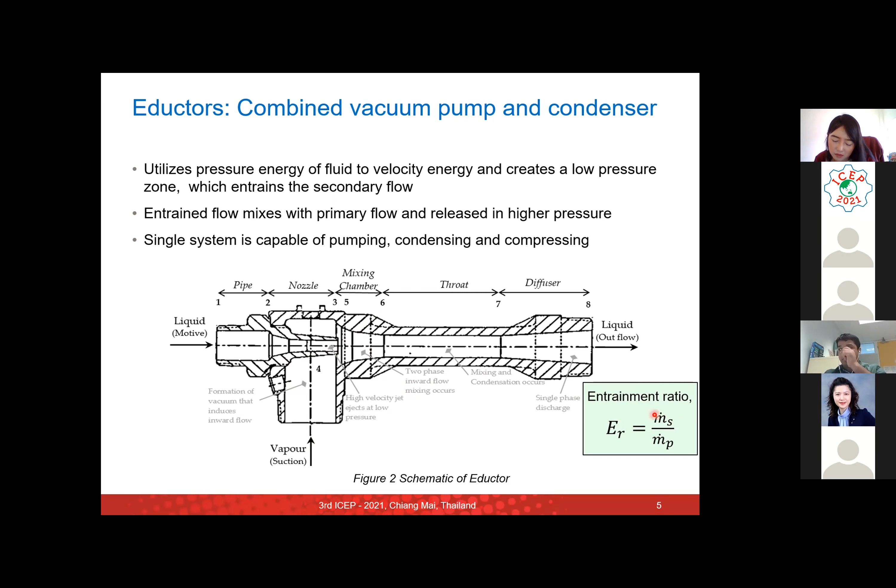So this thing runs in a loop, and condensation of water occurs - this device can act as both a water condenser and a pumping unit. The performance of these devices is measured in terms of entrainment ratio, which is the ratio of suction mass flow rate to primary mass flow rate.

So what are we going to talk about? Basically, eductors for vacuum generation and vapor transfer - the experimental and computational studies that were done, and what the objectives of these two studies were. One was for flow phenomena study, then the application, how it will be implemented in the desalination process, and after implication, if there were any challenges, how we would mitigate those by making design modifications. So these three parts were addressed here.

So basically, an ANSYS Fluent-based CFD solver was used to do the computational analysis. This is the domain - it's an axial domain, just to show the dimension, but the analysis was performed in three dimensions.

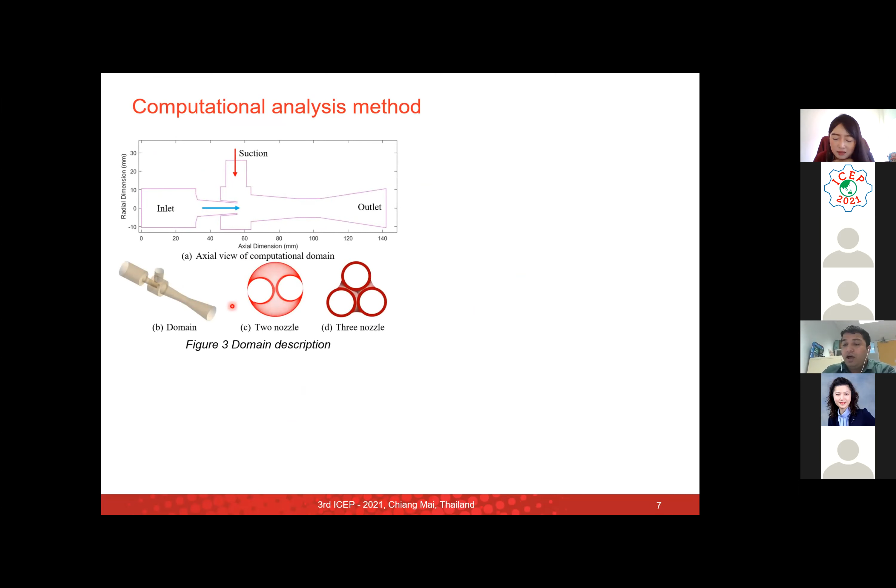These are the basic boundary conditions, where the primary flow was inlet fresh water at 25 degrees Celsius, and the secondary flow, the suction flow, was water vapor at 95 degrees Celsius. The corresponding saturation pressure was given as the boundary condition, and there was the outlet condition.

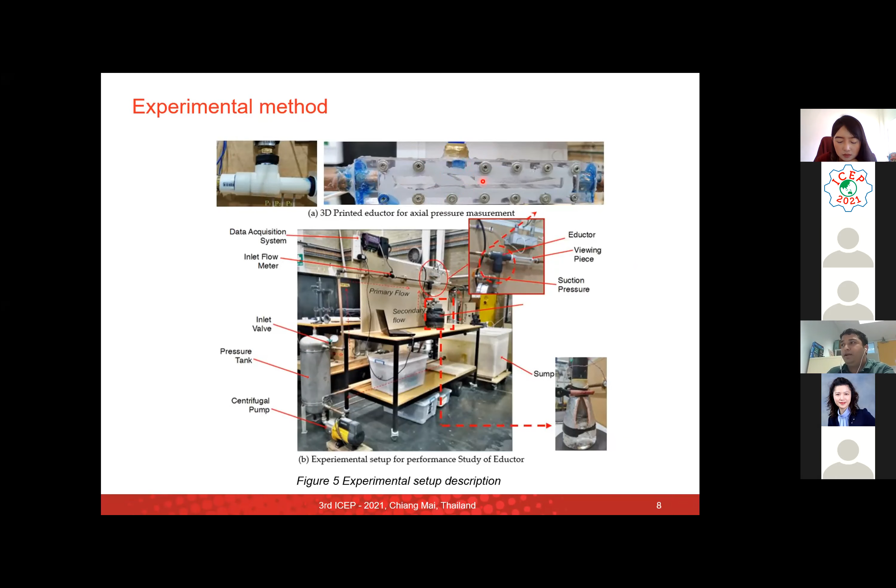The experimental study was performed with this rig here. This is the experimental setup with pumps and pressure tanks, and this is the experimental specimen with the eductor or ejector we are talking about. There were two other samples of eductors which we also studied, where we tried to see the condensation phenomena within the eductor by doing experiments. And there's some tank, a vapor generation system.

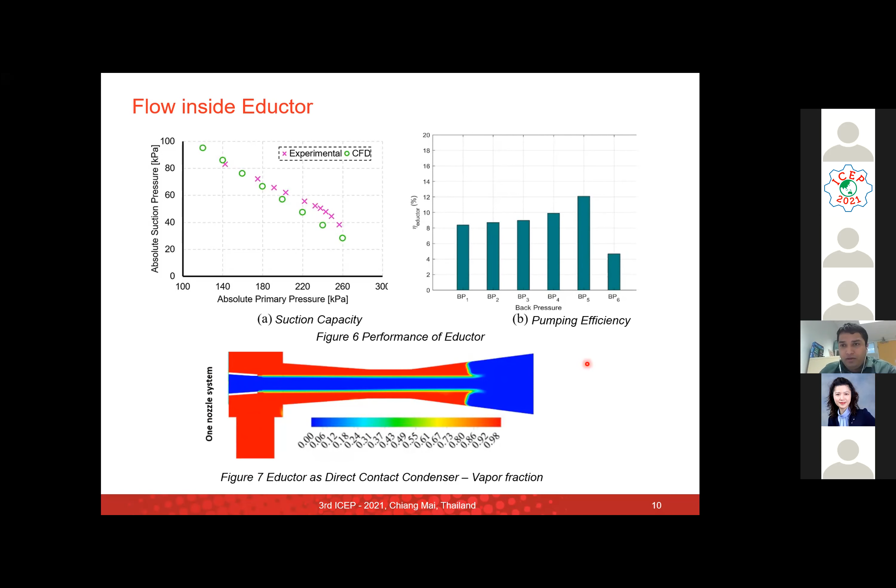Additionally, a computational study was done to see the flow visualization, or what is the mass transfer phenomena within the eductor. We see the vapor coming inside, and this is the jet of water going in. There is interphase interaction at the interface of the liquid water and vapor, and at the outlet, all the vapor that enters gets trapped in, or condensed, and liquid water goes out of the system. This confirms that the eductor is capable of vacuum generation and condensing within its system.

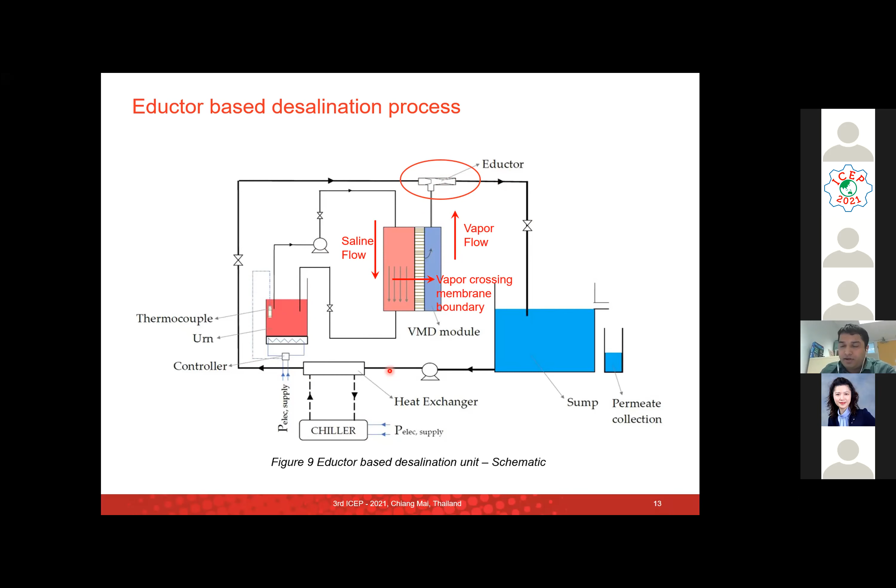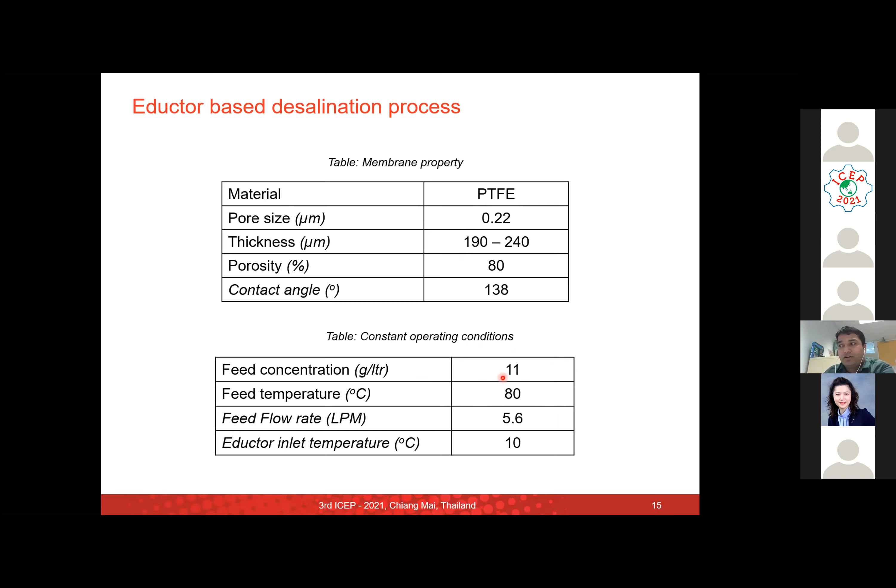The experiment was done with a PTFE membrane with a feed concentration of 11 grams per liter of salt, and the feed temperature of this water was 80 degrees Celsius.

So we could see that there was promising results, but it was not yet equivalent to the current vacuum membrane distillation process, although the process was very largely simplified.

So we thought about what could be the reason. We did some exergy analysis to see where the maximum amount of exergy was being destroyed, and we found it was occurring in the region where the vapor and the liquid come in contact with each other.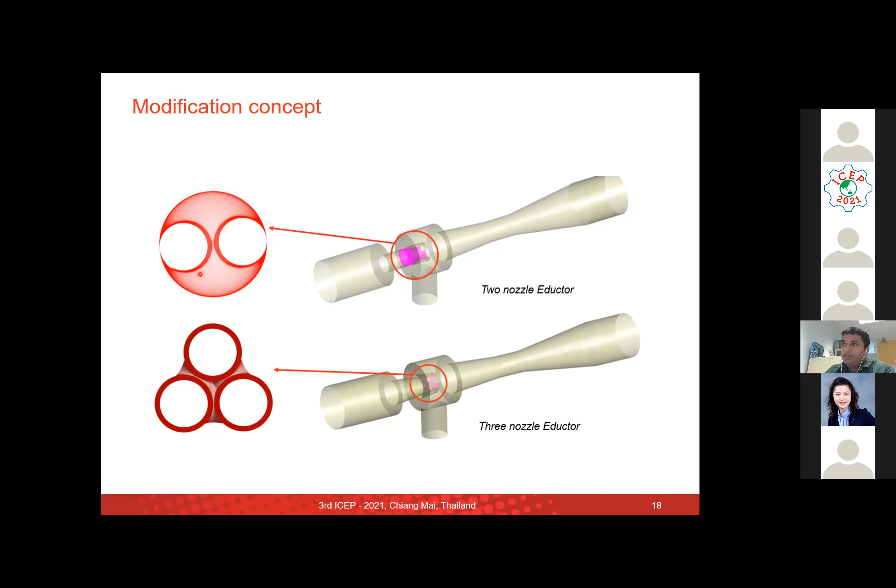So what we did was modify this region by increasing the interface interaction area with 2 nozzles and 3 nozzles, increasing the interface interaction area by 1.4 times and 1.7 times. This is the computational result we see, showing larger mass transfer happening in the system.

This in turn also increased the thermal performance of these eductors. We can see the 3-nozzle design has a significantly larger entrainment ratio compared to 1 and 2 nozzle systems, showing more potential for higher performance in desalination units.

Summarizing this result, when we studied the performance, we could see that eductors are capable of generating vacuum as well as functioning as an isolated condenser unit for water desalination systems, and we could achieve a result up to 43 kg per meter square per hour.

There are some potentials to enhance this mass flux by increasing the mass transfer rate, by increasing the interface interaction area, and by increasing the number of nozzles in the eductor.

In terms of energy and power summary, what we have explored here is a simple mechanical device which can replace the bulky vacuum pumps and condensers in off-grid water desalination units. This can significantly reduce the footprint of existing vacuum membrane distillation systems, and will also simplify these systems in future implications of these projects.

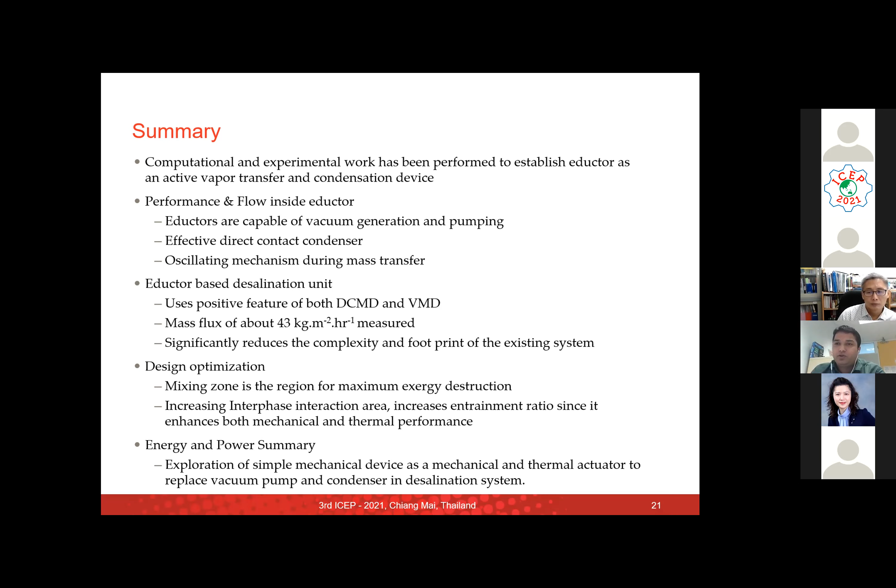So actually, for the optimization part, what we only focused on at that point was exergy destruction, to highlight which of these regions was the key one.

We did the exergy analysis for each of these sections, found the exergy for each of these points on the eductor, and just compared where the maximum amount of exergy was destroyed. That was the only thing done, because we wanted to enhance the thermal performance of the system, or just enhance the mass transfer rate within the system.

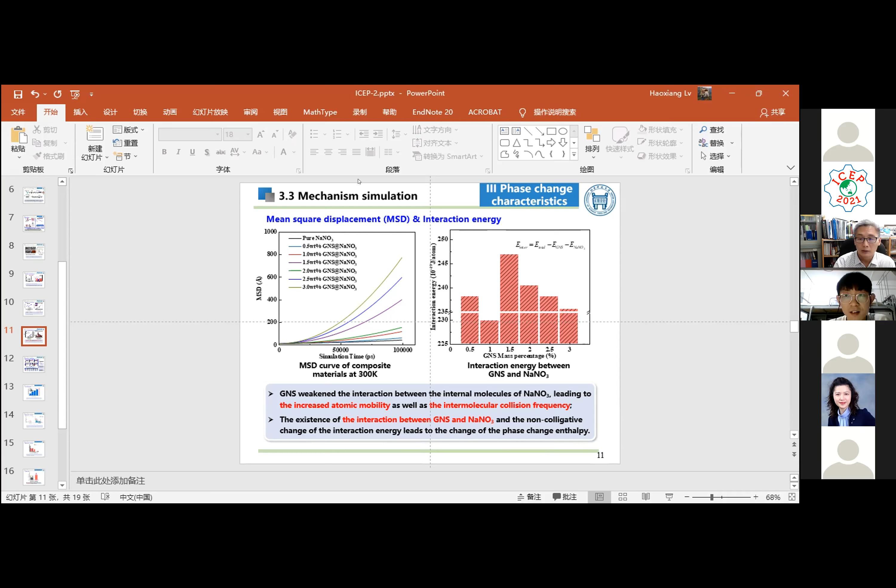Good afternoon, everyone. I'm very honored having the chance to give my presentation to you. My name is Lü Haoxiang, and I come from University of Science and Technology, Beijing.

My presentation topic is study on sodium nitrate doped with graphene nanosheets, heat transport characteristics, and mechanism. My presentation can be divided into 5 main sections: backgrounds, materials and models, phase change characteristics, thermal conductivity, and lastly, conclusions and prospects.

As we all know, renewable energy has the fatal flaw of intermittence and fluctuation. This has created a need for energy storage. Molten salt phase change materials are favored by people because of their low cost, good thermal performance, and good compatibility.

However, the low thermal conductivity has limited their application. In order to improve their performance, a lot of work has been done to improve the thermal conductivity: organic shell, high thermal conductivity skeleton, and the introduction of high thermal conductivity particles.

Among the 3 main methods, nanoparticle composites have the obvious advantage of a simple preparation process. A small number of particles can significantly improve the thermal conductivity. The particles usually have a high thermal conductivity with a size of 1 to 100 nanometers.

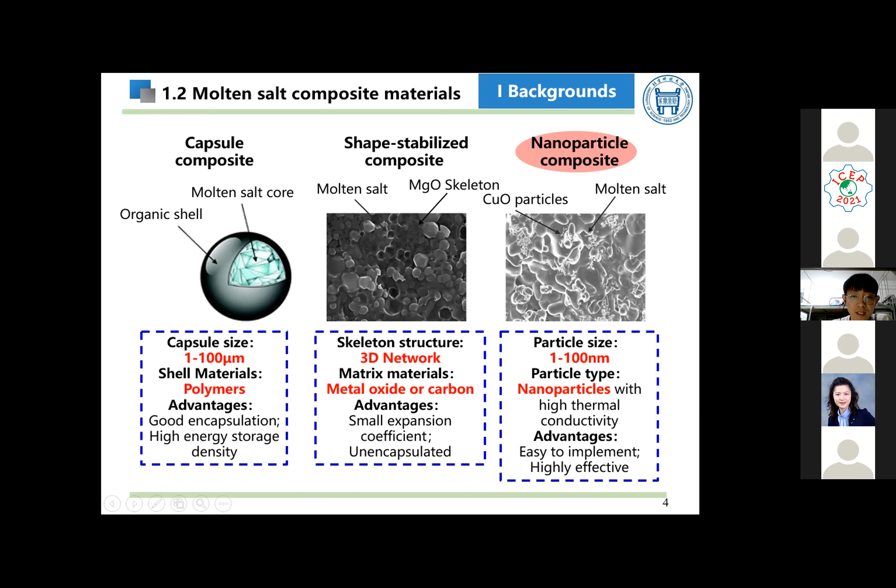In addition, the phase change enthalpy and specific heat also show contradictory decreasing or increasing trends. In this paper, we hope to explain the contradictory results through our work and seek the optimal doping ratio of nanosheet particles. Sodium nitrate, an important component of solar salt, was selected as the phase change material.

Graphene nanosheets was selected as the nano-reinforcer. The phase change characteristics and the thermal conductivity of the composite was tested experimentally, and the mechanism was further discussed by molecular dynamics simulation. The wet method preparation process of the composite materials was selected as shown in the figure.

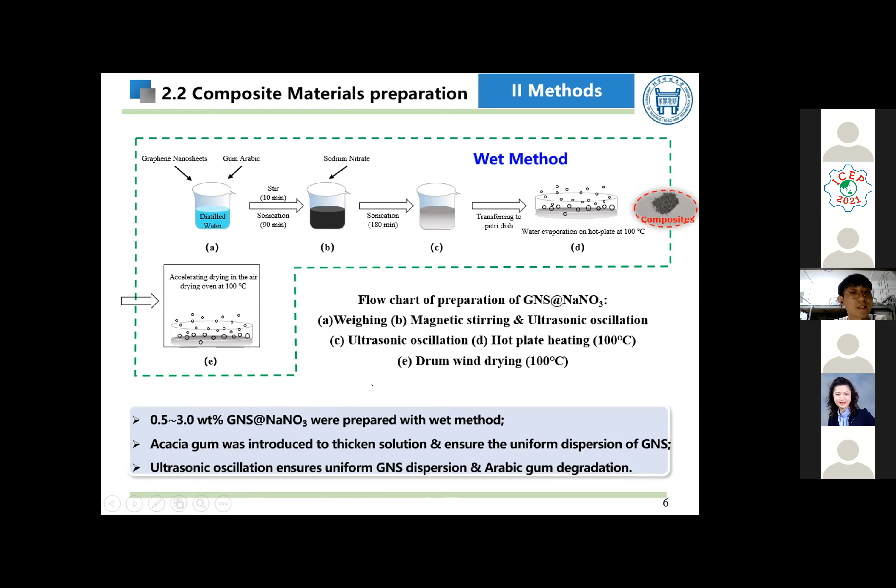Samples of 0.5 to 3% doping ratio were prepared in order to explore the influence of the GNS doping ratio on the phase change thermal characteristics.

Sodium nitrate supercell structure was established by introducing holes, and the reliability was verified by comparing the simulation results and experimental results of the density at 773 Kelvin. GNS was randomly introduced into the sodium nitrate structure model to simulate the random distribution of the nanoparticles.

The surface morphology of the composite materials was characterized firstly by scanning electron microscopy. As you can see, sodium nitrate clusters appear close to the nanosheets as the GNS doping ratio increases.

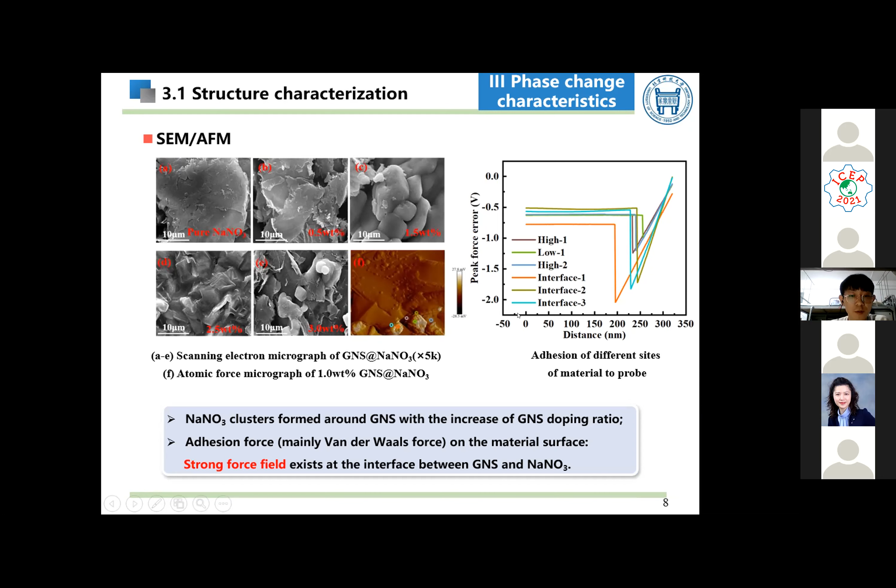At the same time, the adhesion force at different positions on the surface of the composites was measured by atomic force microscopy. As can be seen from the figure, the adhesion at the interface of GNS and sodium nitrate is obviously stronger than other positions, which means that strong force field exists at the interface.

The melting point and the latent heat are as follows. As can be seen from the figure, the melting point of the composite decreased slightly, yet the phase change enthalpy decreased significantly. Interestingly, we found that the phase change enthalpy has a non-colligative decrease. The lowest phase change enthalpy appears with a doping ratio of 1.5%.

To visualize the change in enthalpy, we defined the crystallization efficiency theta. As shown in the figure, theta of all the composites are lower than 100%. The lowest value appears when the doping ratio is 1.5%, which is only 86%.

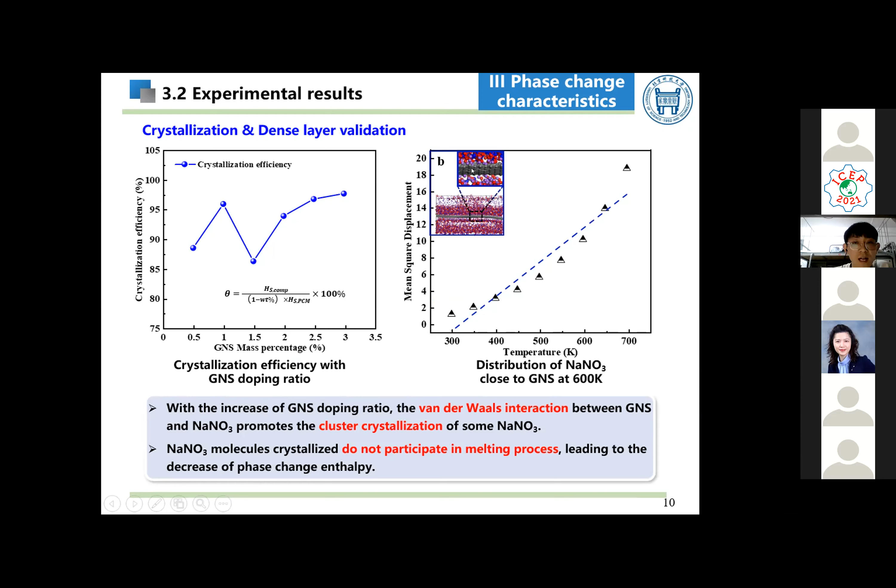We further observed the behavior of sodium nitrate close to GNS. It can be seen that the dense layer of sodium nitrate close to the nanosheet, and they do not participate in melting process.

Mean square displacement can reflect the intensity of particle motion. It can be seen from the figure that MSD gradually increases at 300 Kelvin. We believed that GNS weakened the interaction between the internal molecules of sodium nitrate, leading to the increased atomic mobility as well as the intermolecular collision frequency. Thus, the melting point decreased.

Meanwhile, the interaction energy between GNS and the sodium nitrate was calculated. As the doping ratio increases, the change trend of the interaction energy is exactly the opposite of the phase change enthalpy. It is obvious that the non-colligative change of the interaction energy leads to the change of the phase change enthalpy. To account for the above change in interaction energy, the atomic position distribution of the composite was calculated by taking GNS as the origin.

We can see that there is a sodium nitrate dense layer of 2 to 4 angstrom. Besides, the centroid equivalent distance between the dense layer and GNS increases with the doping ratio.

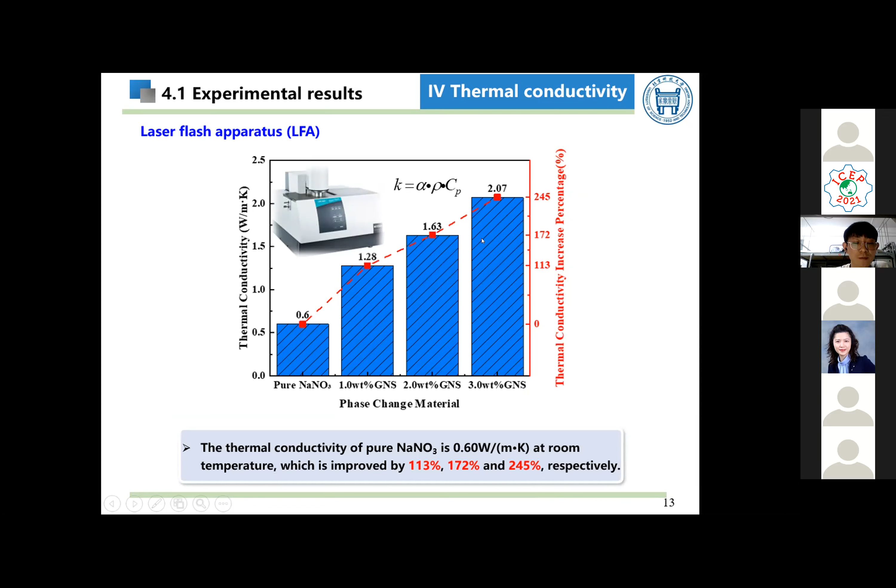As for the thermal conductivity, the thermal diffusivity of the composite was measured firstly by laser flash at room temperature. Then the thermal conductivity was calculated by following equation. Apparently, the thermal conductivity of the composites was significantly improved, an increase of 245% with 3% doping ratio, achieving a breakthrough in the order of magnitude.

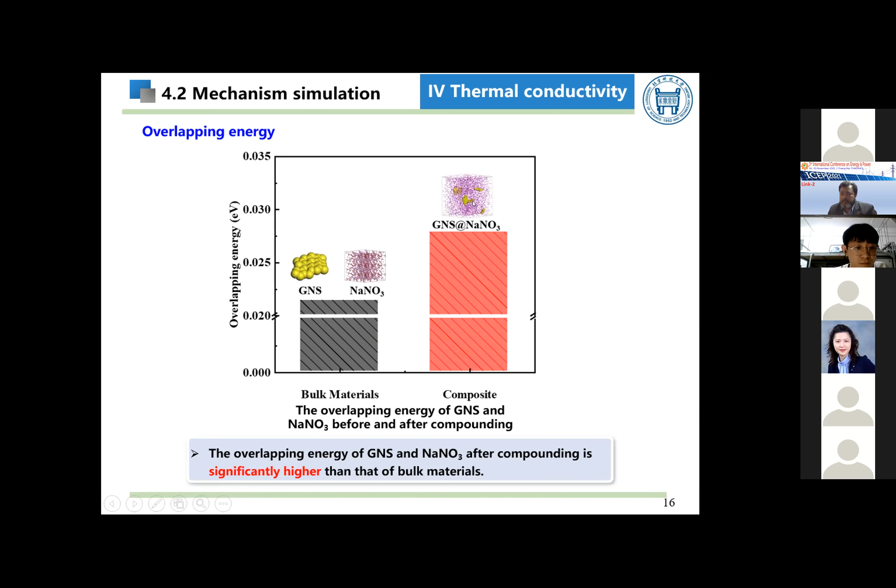The above is all the content of this paper. In general, our conclusions are as follows. The difference of the interaction force between GNS and sodium nitrate under different thickness of sodium nitrate dense layer results in the non-colligative reduction of enthalpy. The high thermal conductivity of GNS and phonon vibration matching between GNS and sodium nitrate are the main reasons for the significant improvement of thermal conductivity. And the 1% doping ratio has the best performance in maintaining the phase change enthalpy and has achieved a 113% increase in thermal conductivity compared with other doping ratios.

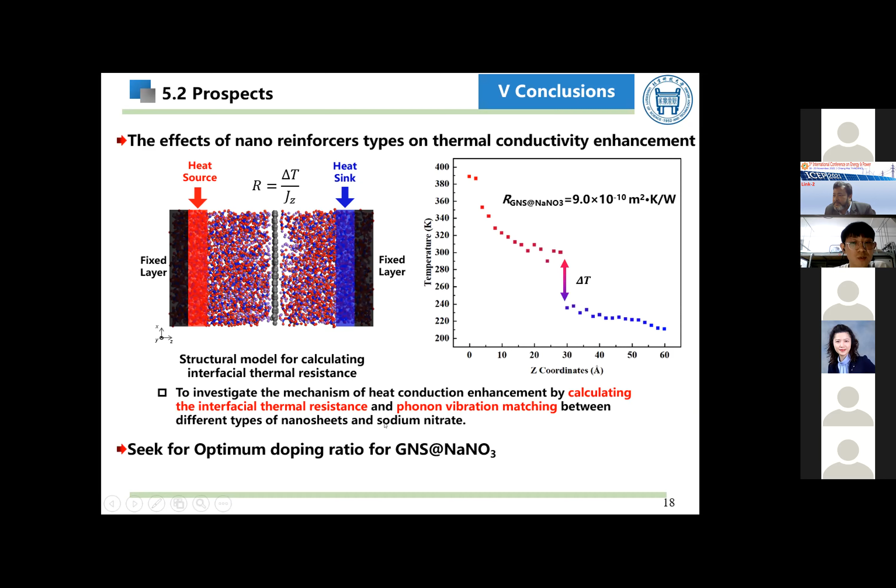Besides, the phase change properties and the thermal conductivity of different mass doping ratios would be calculated to seek the best one. That's all of my presentation. Thank you for your attention. I welcome your questions and suggestions.

Oh, thank you. Very good presentation. Any question from the floor?

Lü, Hey, yeah, Mr. Lü is my student, so I cannot answer. Maybe I also can answer the question, right? Yeah, yeah, okay, I just want to know the error bar.

There's a flash apparatus test. Yeah, what is it? Maybe we can add it later. In our paper, maybe we can add the error bar. But do you know how many, about? Every data are measured 3 times.

Oh, it is, you know, I know. These are average values. Okay, yeah. But the error magnitude, didn't you have it? We have the data, but I didn't add it on our presentation. Sorry. Okay, yeah.

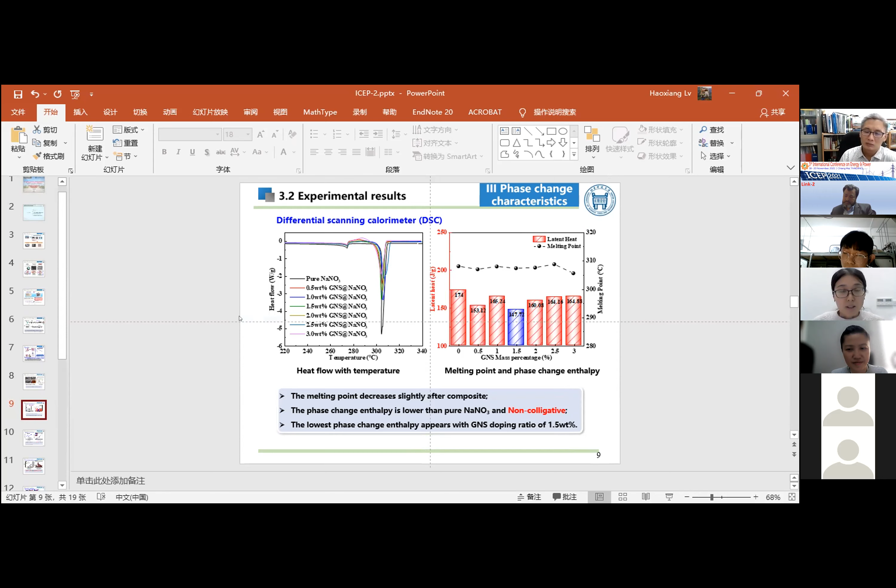And then I'm wondering, the thermal conductivity you've mentioned in your material, is this thermal conductivity have something to do with the direction of the material? I mean, is it isotropic or anisotropic?